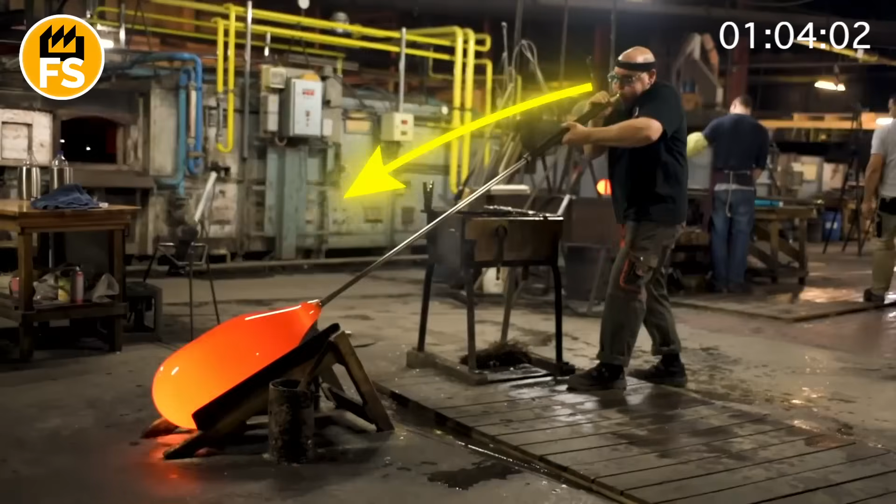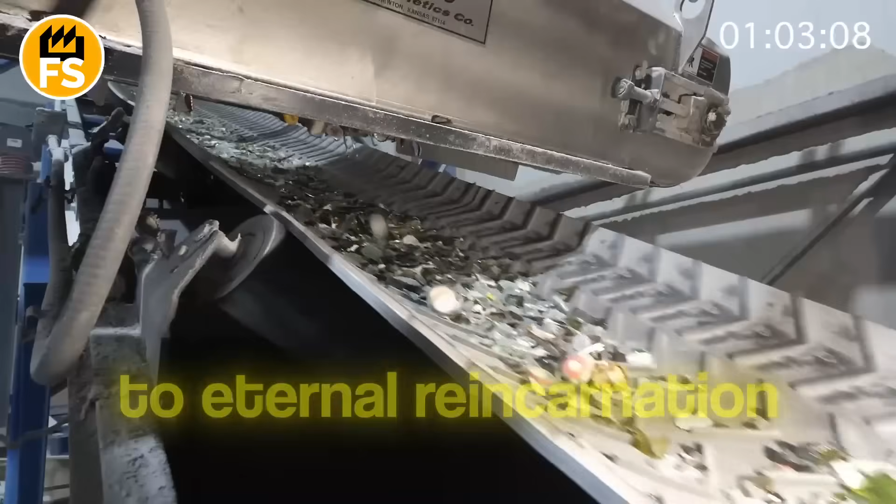From ancient glassblowers who breathe life into red-hot bubbles, to futuristic tin baths where glass is born perfectly flat like a mirror. But behind this symphony of fire lies a secret. What if glass holds the secret to eternal reincarnation, which will allow us to turn the world upside down? Watch until the end, and you'll find out something you never imagined about this transparent, amazing material. Ready for the journey?

Although the vast majority of architectural glass today is born from a perfectly flat, fiery river flowing over molten tin in the float process, the true soul of the material is revealed in methods that give it character and uniqueness. This path from a simple transparent sheet to a work of decorative art is a fascinating journey.

To create glass with individuality that carries the imprint of a human touch, masters still turn to techniques that have existed for centuries. A glassblower dips his long, hollow pipe into a furnace where a mass of sand and other minerals boils at a temperature of 2,000 degrees Fahrenheit. He gathers a honey-like ball of molten glass on the end of the pipe, and, skillfully rotating it, begins to blow air into it. The initial bubble, born from his breath, gradually transforms into an elongated, glowing hollow cylinder.

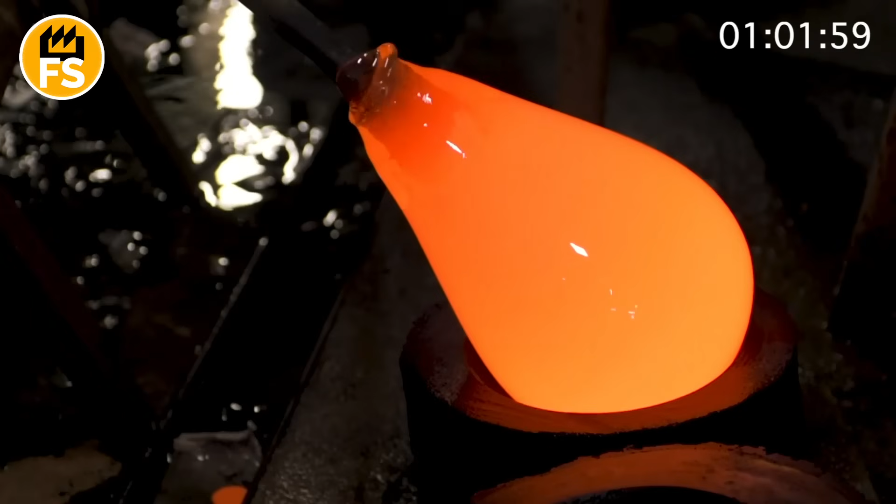Thanks to the force of gravity and skillful swinging, this cylinder can reach a length of several feet. After the ends of the cylinder are cut off, it is cut lengthwise and placed back in the furnace. There, under the influence of heat, it slowly unrolls, like a scroll, and the masters smooth it into a flat sheet.

Glass born in this way is never perfectly flat. It lives its own life, retaining barely noticeable waves, tiny air bubbles, and thin lines that tell the story of its fiery birth. This glass has a watery, organic quality that cannot be replicated by a machine.

But the creation of unique glass does not stop at forming the sheet itself. Other methods transform ordinary sheets into complex decorative elements. Fusing or sintering allows artists to literally paint with glass.

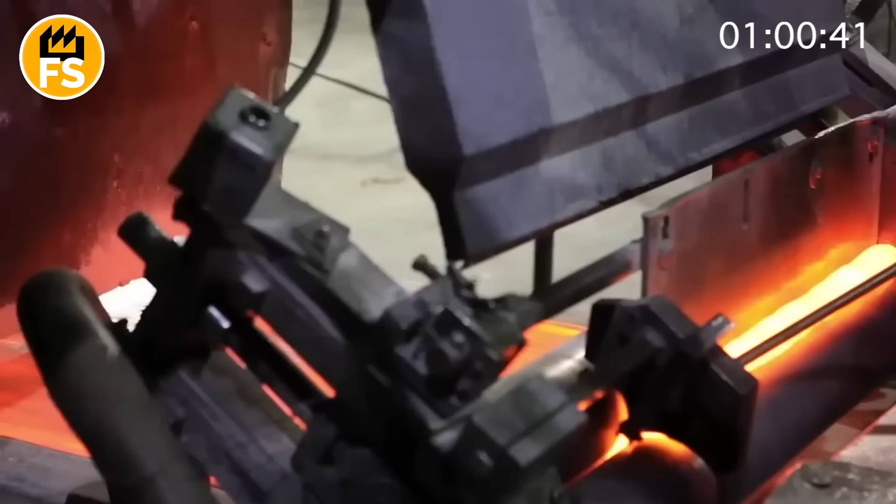Multicolored pieces of glass are laid out on a base sheet and sent to a furnace, where at a temperature of 1,500 degrees Fahrenheit, they merge into a single whole, creating bright, painting-like compositions.

Closely related to this is the process of slumping or bending, where a flat sheet of glass is heated until it becomes soft and sags under its own weight, taking the shape of a ceramic or metal mold lying beneath it. This allows for the creation of curved panels and three-dimensional glass sculptures.

Modern technologies add even more possibilities. Lamination allows for baking colored films, fabrics, or even thin sheets of metal between two sheets of glass, creating endless variations of color and texture.

Sandblasting and chemical etching remove the top layer of glass, making it matte and creating complex patterns on its surface, from simple geometric shapes to photorealistic images.

Thus, by combining ancient crafts with advanced technologies, modern production transforms simple glass into an expressive architectural material, capable of shaping light, color, and space.

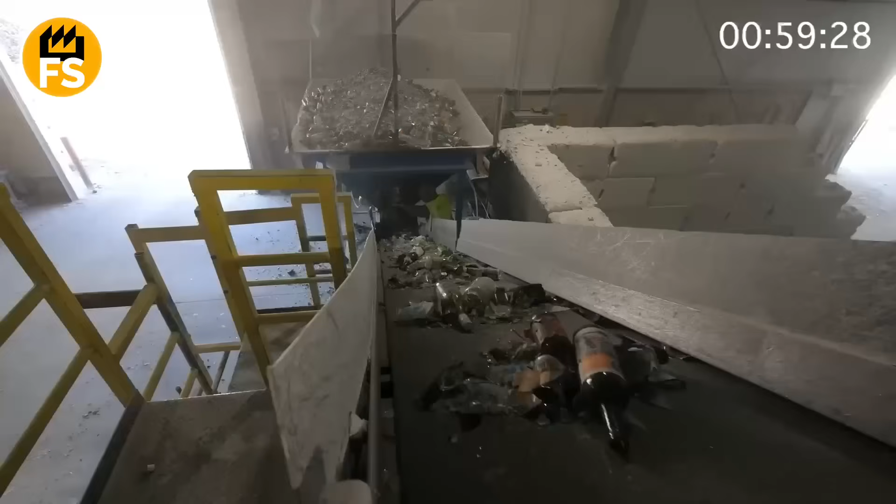In the modern world, where tons of used glass containers are collected daily, the path from the trash can to a new bottle is not just remelting, but a high-tech odyssey, controlled by computers and light.

Imagine a mountain of broken glass, reaching a height of tens of feet, where transparent, green, and brown fragments are mixed with labels, caps, and ceramic impurities. Turning this chaos into pure, raw material is a task for a whole complex of smart machines.

It all starts with mechanical crushing, where steel hammers turn bottles and jars into fragments a few inches in size.

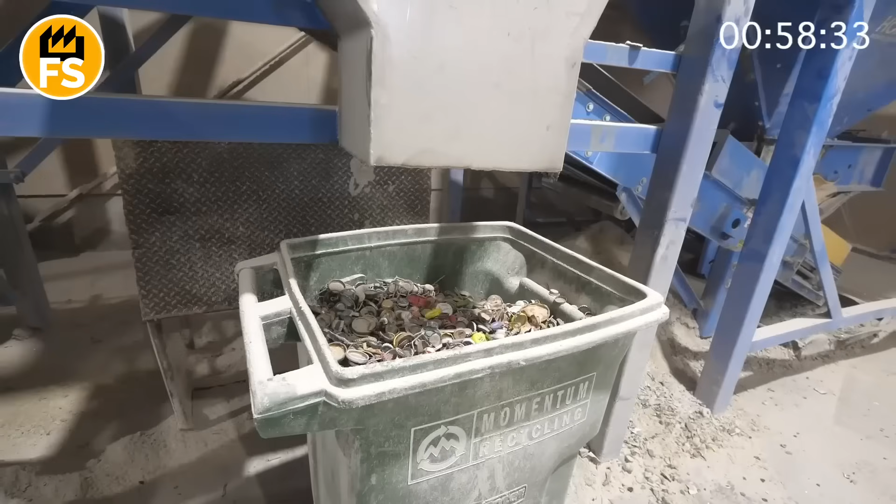This stream of glass, resembling a moving river, embarks on a journey through a labyrinth of sorting systems. First, powerful magnetic separators pull any steel impurities from the stream, and then eddy current systems literally shoot out aluminum caps and foil into separate containers. Powerful air currents blow away light paper labels and plastic remnants.

But the most difficult task lies ahead: removing impurities that are almost indistinguishable from glass in weight and size, such as pieces of ceramics, stone, or porcelain. These enemies of glass do not melt at standard temperatures and turn into defects in new products, so their removal is critically important. This is where optical sorting comes into play. The glass fragments are accelerated on a conveyor belt to a high speed and fly through a scanning zone.

For a fraction of a second, each fragment is illuminated by bright light, and high-speed cameras take hundreds of pictures. A computer system with lightning speed analyzes the images, identifying foreign bodies by their transparency, structure, and shape.

As soon as the system spots an opaque piece of ceramic, it instantly calculates its trajectory and gives a command to a battery of air nozzles. A precise, sniper-like stream of compressed air knocks the unwanted element out of the general stream, sending it to waste. This process is repeated thousands of times per minute.

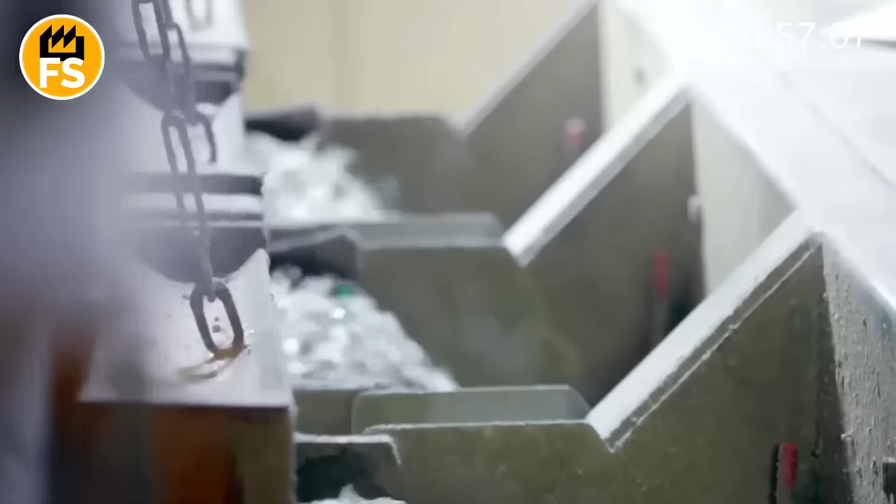In parallel, an equally important sorting by color takes place. The same optical systems analyze the spectrum of light passing through each fragment. The machine distinguishes between crystal clear, rich green, and deep brown glass.

Depending on the set program, the system can, for example, select only transparent glass, knocking out all colored fragments with air jets, or separate the stream into three separate color fractions.

As a result, at the output, a perfectly clean, color-sorted raw material is formed: cullet, ready for a new life without loss of quality, which is the pinnacle of the modern circular economy. Then, flat glass can be made from this raw material.

The birth of modern flat glass is a symphony of fire and precision, a spectacular process that transforms ordinary raw materials into perfectly transparent sheets. It all begins in a huge melting furnace, the fiery heart of the factory that operates continuously for years.

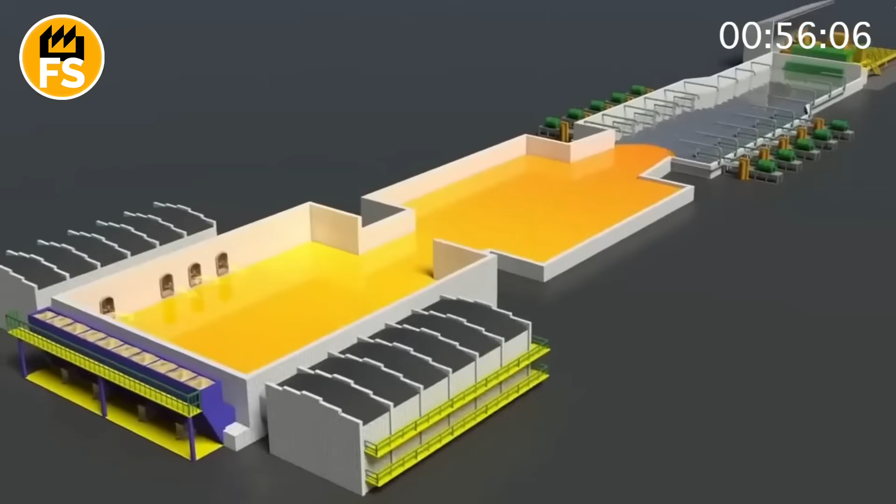Into this furnace, resembling a lake of molten fire, a carefully dosed mixture, or batch, is loaded, consisting of pure quartz sand, soda ash to lower the melting temperature, and limestone for stabilization. To this is added a significant amount of cullet, or crushed recycled glass, which helps to speed up the melting process.

Inside the furnace, at infernal temperatures approaching 3,000 degrees Fahrenheit, these solid components slowly transform into a homogeneous, viscous liquid.

The melting process is strictly controlled to ensure the complete dissolution of all particles and the removal of gas bubbles, creating a flawlessly clean melt.

From the furnace, this stream of red-hot to bright orange-colored glass, resembling a river of lava, smoothly flows into a bath of molten tin. This is the culmination of the process known as the float process.

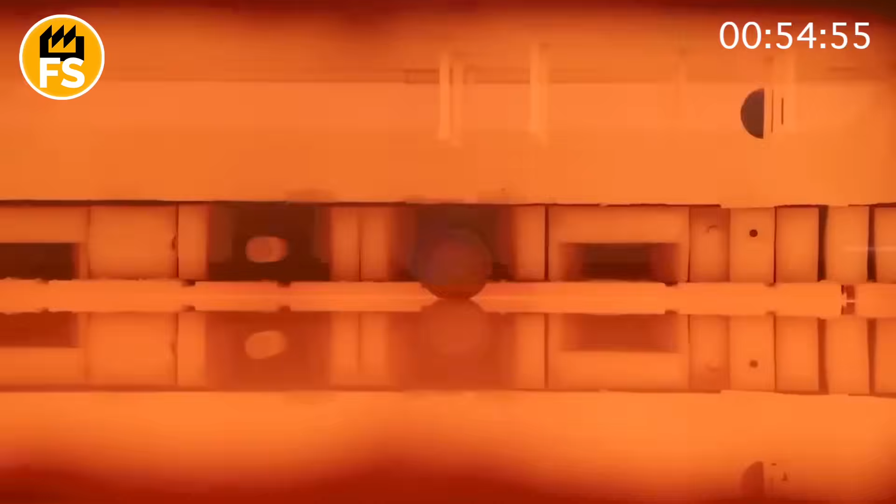The tin bath, stretching for hundreds of feet in length, has a perfectly smooth, mirror-like surface. Since glass is lighter than tin and does not mix with it, it spreads over the surface, forming a perfectly flat ribbon of uniform thickness.

Gravity levels it from below, and surface tension smooths it from above, creating impeccable optical quality. The speed at which this ribbon is pulled from the bath determines its final thickness with an accuracy of a fraction of an inch.

After forming a perfectly flat surface, the glass ribbon, still very hot but already solid enough to hold its shape, enters the most tranquil but critically important stage: annealing. It enters a long tunnel known as an annealing lehr.

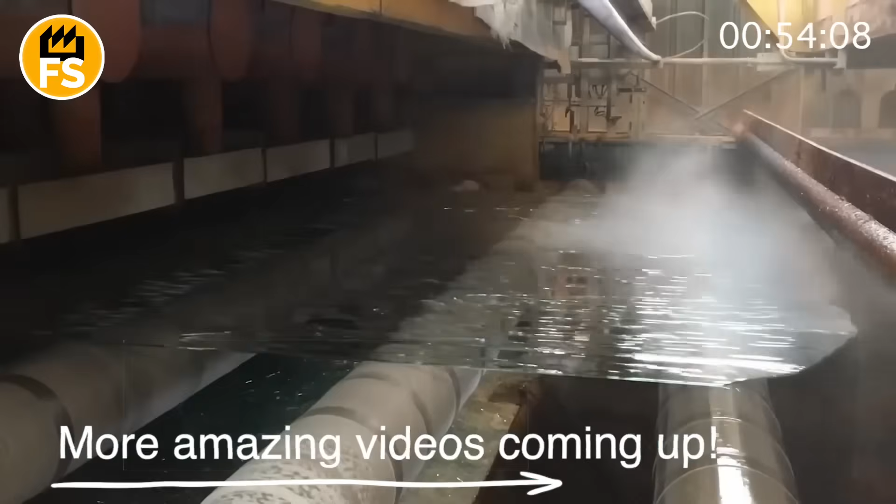If the glass were cooled too quickly, its surface would contract faster than its interior, leading to the creation of huge internal stresses that would make it brittle and prone to cracking.

In the lehr, however, the temperature of the glass is slowly and controllably reduced over several hundred feet, from over 1,000 degrees Fahrenheit to room temperature. This process allows the entire sheet, both surface and core, to cool evenly, relieving all internal stresses.

From the other end of the lehr emerges a single, flawless, continuous ribbon of completely transparent, stress-free glass, ready for automatic cutting into huge sheets that will become the windows, facades, and doors of our world.

Every year, only a few dozen combat machines capable of changing the course of a battle are produced worldwide. One such giant is born in the heart of the United States at the Boeing factory in Fort Worth, where every bolt, every weld seam is inspected with micron precision.

Here, fuselages made from metal plates are joined into a single, strong body, and powerful T-700 engines and Hellfire missiles turn the machine into a formidable weapon.

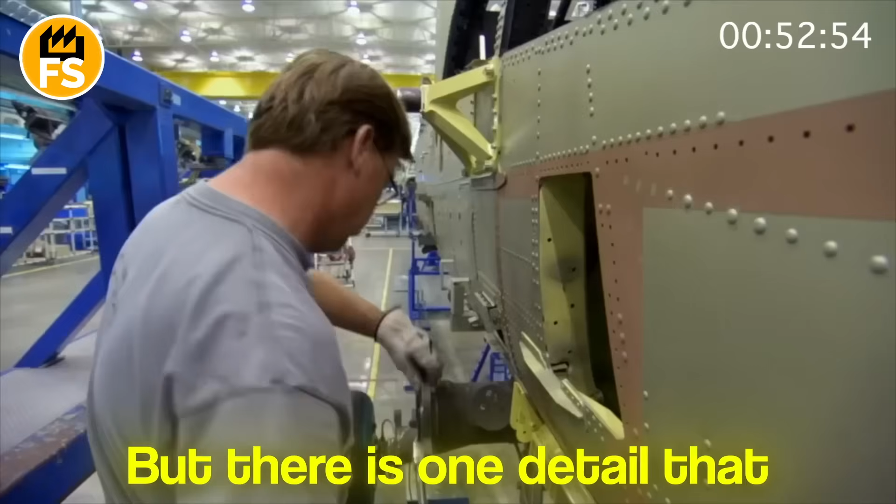But there is one detail that only those who work behind the scenes of this production know. Watch until the end, and you will discover a secret that changes the perception of these helicopters forever.

The main production facilities are located in the United States, particularly at the Boeing plants in Fort Worth, Texas, where the helicopter is manufactured using modern technologies. At these plants, the assembly of the helicopter's main components, such as the fuselage, rotors, and weapon systems, takes place. The production process includes automation to increase efficiency and accuracy, which is critically important for military equipment.

An important part of the production capacity is also contracts with component suppliers. Orders for electronics, engines, control systems, and other parts come from various corners of the world. These suppliers must meet strict quality standards to ensure the reliability and combat readiness of the helicopter.

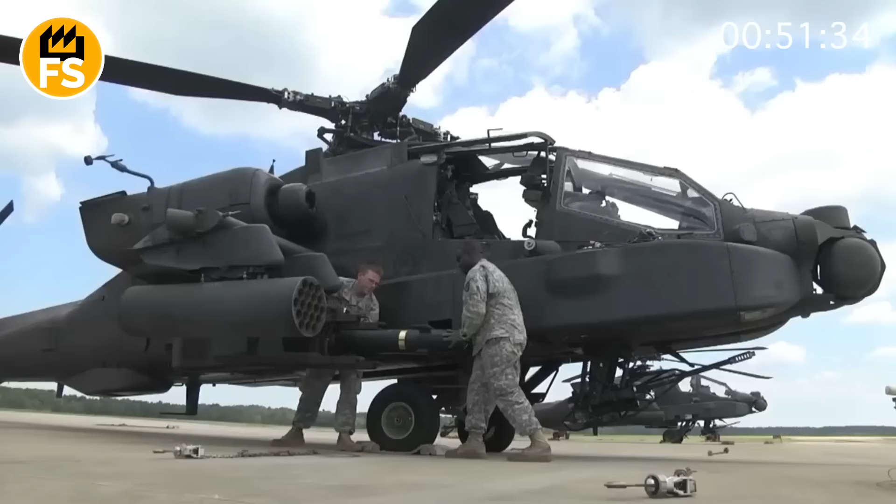The U.S. Department of Defense works closely with Boeing to control production, ensuring compliance with all specifications. This includes conducting regular inspections and tests at various stages of production to account for all potential problems.

The production facilities engaged in manufacturing the AH-64 are constantly improving their processes. With the introduction of new technologies and production management methods, such as lean manufacturing, the company strives to reduce costs and shorten production time without compromising quality.

The main components, such as electronics, engines, navigation, and control systems, are manufactured in different countries. For example, the T-700 engines used in the AH-64 are produced by General Electric in the USA.

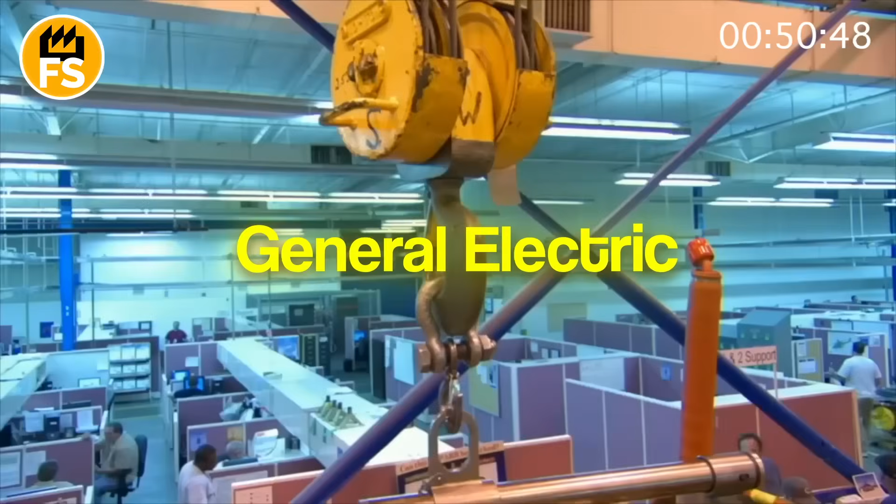Weapon systems, such as Hellfire missile launchers, are manufactured by many defense contractors, both in the US and outside the country. The electronic system, including radar and fire control systems, is supplied from various countries, such as Israel and the United Kingdom. This allows for the integration of innovative technologies that are constantly being improved in military aviation.

The delivery of components to the Boeing production facilities in Fort Worth is carried out through various logistics channels. International transport is often carried out by air and sea, depending on the urgency and volume of the cargo. Key components can be delivered by express air transport to reduce manufacturing times.

Upon arrival at the Boeing plants, the components undergo additional inspection to identify possible defects and non-conformities.

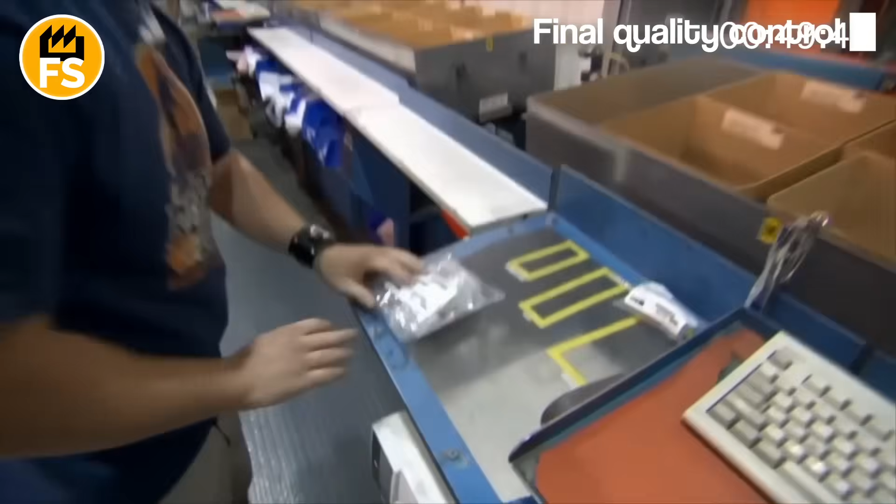After the delivery of all components to the Boeing production facilities, they arrive at the huge factory territory in Fort Worth, where several hangars are organized for helicopter assembly. Here, a primary inspection of each batch of parts is carried out. Specialists carefully inspect the components to identify any defects or non-conformities with standards, which ensures a high level of quality.

The production process begins with the assembly of the fuselage, which is the helicopter's foundation. In this stage of work, huge metal panels, drawn out in the form of long and wide sheets, are used. The fuselage consists of several sections that are welded together to create a single, strong body.

First, the workers coordinate all requirements and drawings, focusing on the accuracy of measurements. They carefully install the fuselage base on a special platform that allows easy access to all elements.

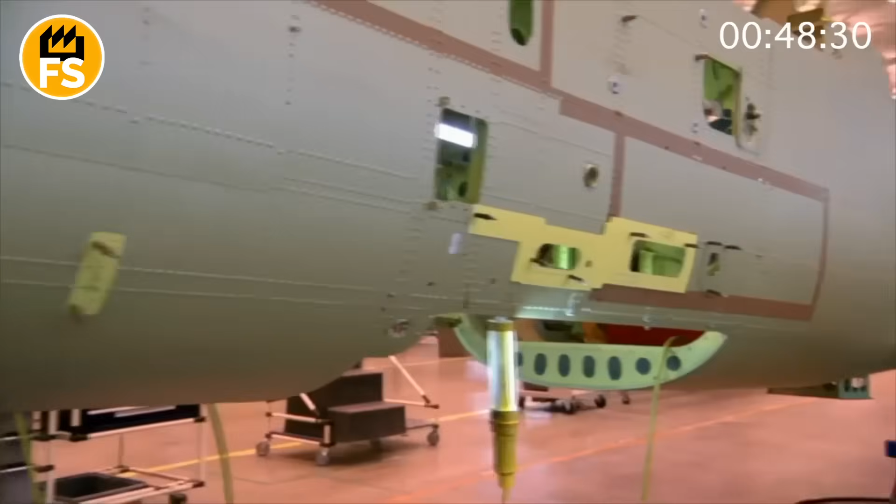In parallel with this, engineers ensure that each element meets strict quality standards. During the fuselage assembly process, workers use a variety of tools, from electric drills to specialized welding machines.

Welding takes place far from any unpredictable movements, as this is critically important. Even the slightest inaccuracy can affect the helicopter's combat stability. The flame of the welding illuminates the workspace, adding a bit of heat to the surrounding environment.

After the main parts of the fuselage are joined, it is checked for leaks. This includes leak testing where liquid is pumped through special pipes to ensure that the body's reliability meets the requirements. Usually, workers suspect a problem if they hear a sound similar to a whistle or a pop, which could indicate issues.

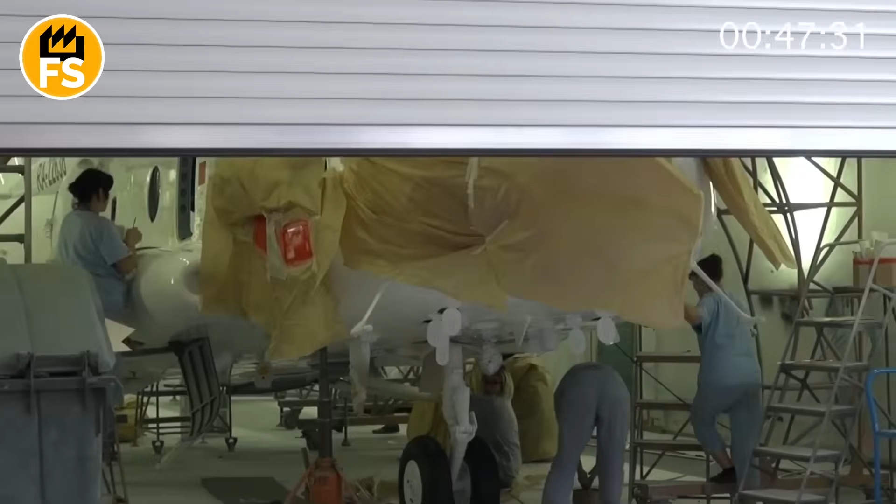When the fuselage successfully passes all tests, it is time for painting. The application of coatings is important as it prevents corrosion and increases resistance to weather conditions. After painting, the fuselage is sanded to ensure a smooth surface, and then all parts are checked again to confirm they are installed correctly.

After the fuselage assembly is complete, the next stage is the installation of the electronic systems, which play a critical role in the combat effectiveness of the AH-64. After the fuselage is prepared, it is moved to a special hangar where technicians begin to carefully install various electronic components. These systems control everything from navigation to the weapon control system.

During this process, specialists install elements such as radar, which provide an overview of the battlefield, as well as fire control systems. These components are particularly sensitive, so it is important to adhere to huge accuracy. Workers use various tools, such as drills and screwdrivers, as well as specialized devices for laying wires.

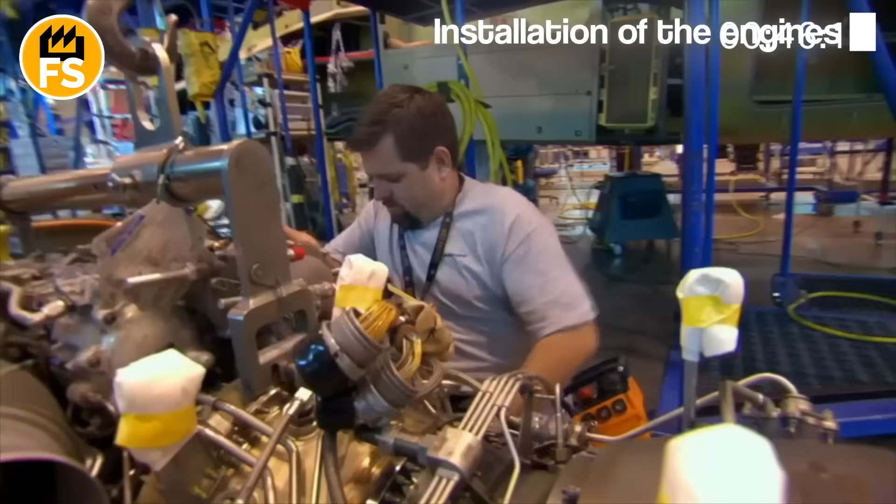The next step is the installation of the engines. For the AH-64, T700 engines are used, which are powerful and reliable. After the engines are delivered to the factory, technicians check them for compliance with technical specifications.

During the installation process, the engines are mounted on the fuselage, and all necessary systems, such as fuel supply and cooling, are connected. This process requires great attention to detail, as the engines must be securely fixed and correctly connected.

After the installation of the engines and electronics, the stage of integrating the weapon systems begins. The helicopter is equipped with various armaments, such as Hellfire missiles and an M230 machine gun.

In this stage, technicians use multi-step procedures to install and calibrate the systems. Each weapon unit is equipped with electronic systems that ensure its functionality. After installation, a check for the compatibility of all components is carried out.

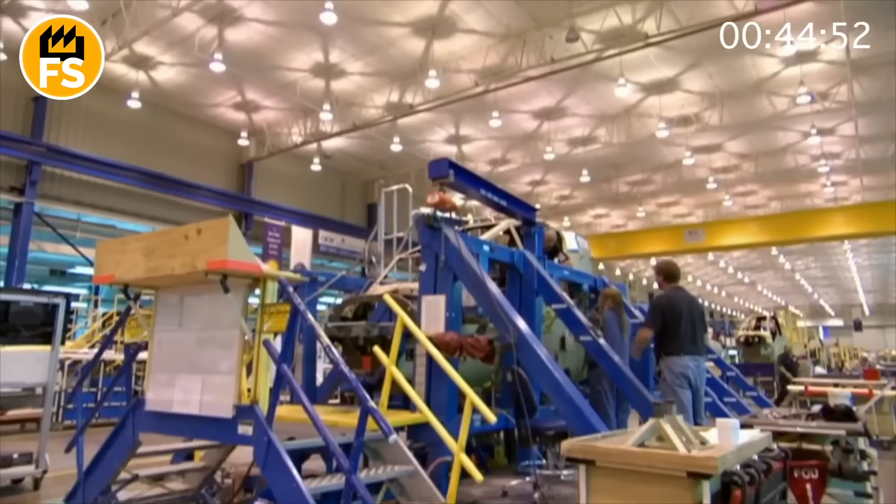Having completed the integration stages, the fuselage proceeds to final assembly, where various systems are connected: hydraulics, as well as control mechanisms. Hydraulics provide the helicopter's mobility, and its installation is a critically important task. Technicians check all connections for tightness, as a leak of hydraulic fluid can lead to serious problems during flight.

During the testing of the AH-64, a real show of technical skill takes place. Aerodynamic checks are conducted in a large open area where the helicopter takes to the air, demonstrating breathtaking maneuvers. From a height, it performs turns, hovers in the air, and makes steep descents, showing its stability and ability to react quickly to the pilot's commands. Spectators can see how the powerful engines work at maximum revs, filling the air with their roar.

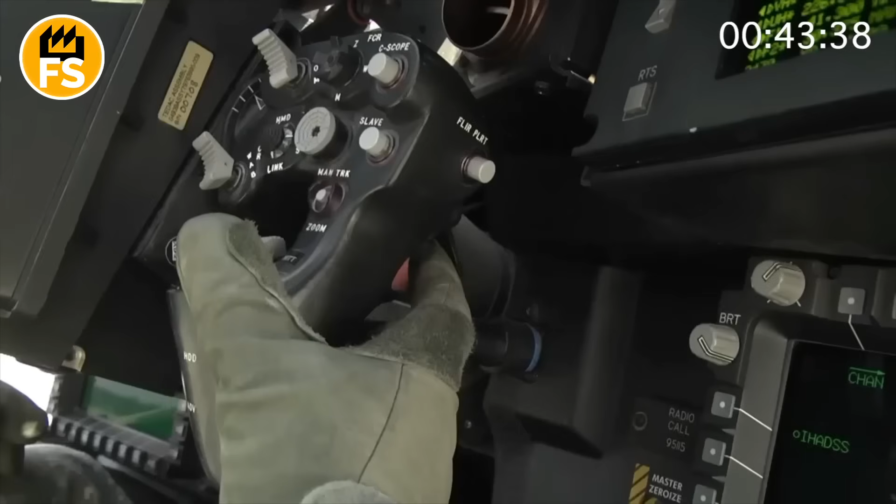On the ground stand, the atmosphere is also tense. Experts closely watch every movement of the helicopter, keeping an eye on the digital indicators on the monitors. The sounds of testing the electronic system, as the helicopter actively responds to control commands, are impressively complex. When the weapon system is launched and green indicators appear on the monitors, everyone present experiences a moment of elation. It's a sign that everything is working, and the helicopter is ready for combat missions.

The team of engineers is gathered on the territory. They are dressed in special equipment and focused on their work. When the entire system passes the checks, a look of satisfaction appears on the experts' faces. Each of them knows that their work is bearing fruit, and the ready-for-real-flights helicopter will become an important element of military power. These tests provide not only an adrenaline rush, but also pride in the technologies that bring it to life.

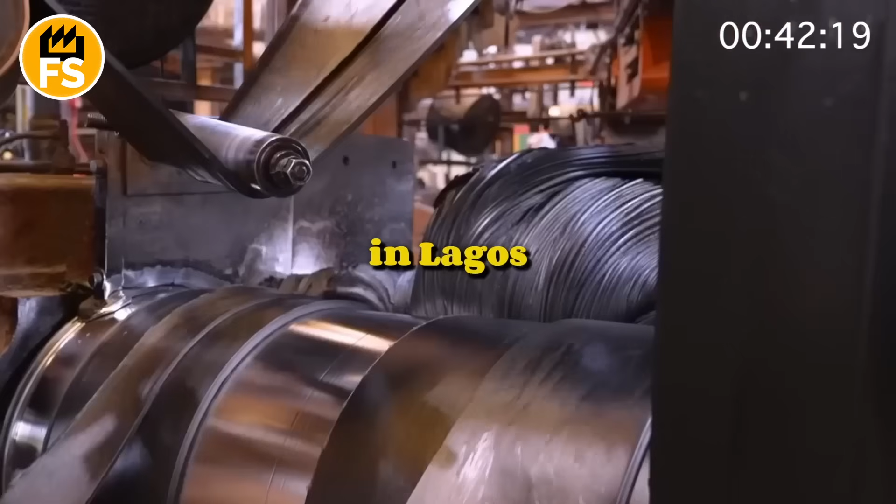Every hour, over 4.5 million tires are discarded worldwide. But in Nigeria, a country with over 220 million people, old tires are not just trash. They are a currency for survival, an underground business, and even art. Here, worn-out rubber doesn't go to a landfill. It's taken apart, rolled on bicycles, cut by steel jaws, and baked into colorful tiles. How did poverty, ingenuity, and chemistry create a whole shadow industry? And what unexpected secret is hidden in one of the largest pyrolysis furnaces in Lagos? Watch until the end, and you'll see what they probably don't show in textbooks.

Nigeria is the most populous country in Africa, home to over 220 million people. For many of them, a car is the primary means of transportation and doing business. Millions of passenger cars, minivans, trucks, and motorcycles travel the country's roads daily, inevitably wearing out their tires. The more vehicles, the larger the flow of used tires.

The condition of roads in many regions of Nigeria is, to put it mildly, far from ideal. Numerous potholes, ruts, gravel surfaces instead of asphalt, and the general neglect of the road network lead to extremely rapid and aggressive tire wear. A tire that could last 40 or 50,000 miles in countries with high-quality roads might become unusable 2 or even 3 times faster in Nigerian conditions.

A significant portion of cars in Nigeria are imported used vehicles, known as tokunbo. They often arrive from Europe, the United States, and Asia, with already significantly worn tires that require almost immediate replacement after purchase. This creates an immediate stream of old tires into the waste market.

Due to economic hardships, many Nigerian drivers cannot afford expensive and high-quality tires from leading brands. They are forced to choose the cheapest options: either low-quality new tires, mainly from Asian countries, or already used tires. Both options have a very short service life, which creates a continuous cycle of buy, drive a little, throw away.

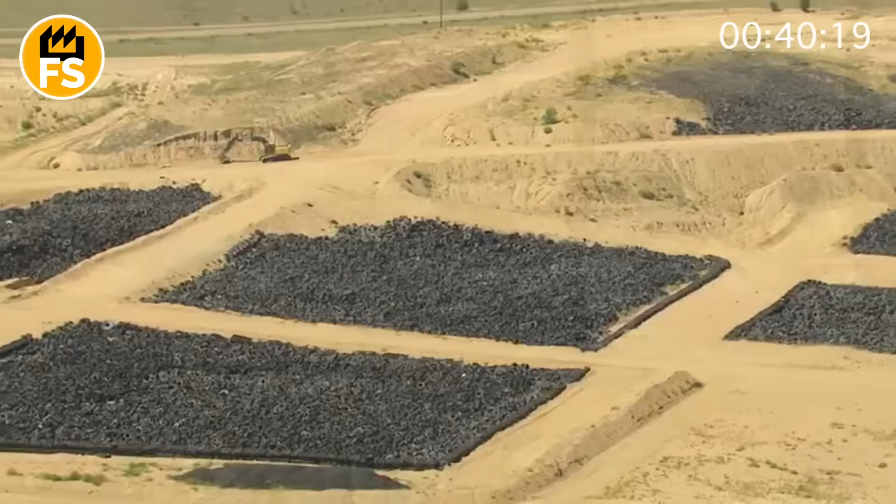Until recently, the country effectively had no established and efficient state system for collecting and recycling tires. Without proper disposal infrastructure, old tires simply accumulated in makeshift dumps, on roadsides, in vacant lots, and in water bodies, turning into a serious environmental threat. Only recently have entrepreneurs begun to see a business opportunity in this.

The process of collecting tires in Nigeria is a fascinating, mostly informal, and multi-level system that operates not by government decree, but by the laws of the market and simple economic benefit. At the heart of the entire chain are thousands of individual collectors. These are often young men or people with low income, for whom collecting waste is their main livelihood.

So, where do they collect them? The main source is tire shops and car repair workshops. Drivers leave old tires after a replacement. For the workshop owner, this is trash that needs to be disposed of. A collector pays him a small amount, or simply takes them for free.

Collectors also literally patrol their neighborhoods, looking for abandoned tires in makeshift dumps and on roadsides. The tires are rolled by hand, transported on wheelbarrows, bicycles, or small 3-wheeled scooters. One old tire can cost from 50 to 200 naira, a few American cents, depending on its condition and size. It's not much, but by collecting several dozen a day, one can make a living.

Collectors rarely deal directly with large factories. They sell their harvest to local middlemen.

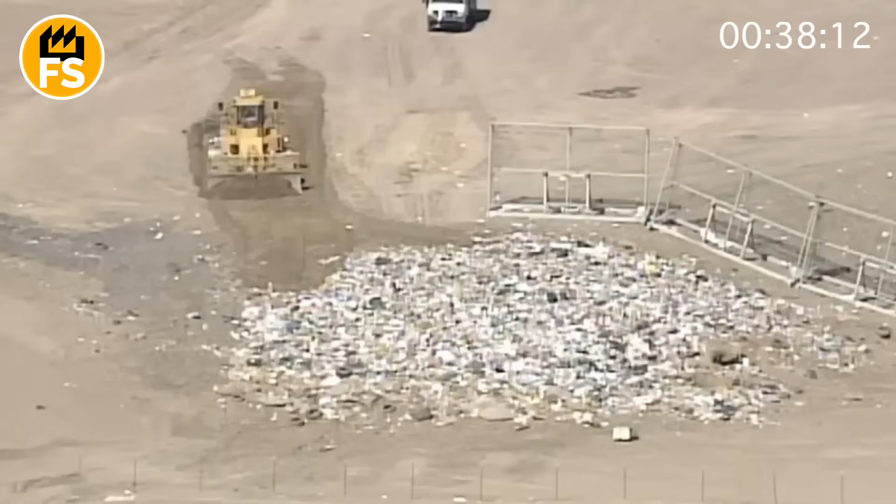This is where those mountains of tires appear, but on a local scale. In the yard of such a middleman, you can see piles of tires that he accumulates, waiting for a good price or a sufficient volume for transport. Basic sorting might happen here, for example, separating truck tires from passenger car tires.

The middlemen make their profit on volume. They buy cheap from collectors and sell for a higher price to large processors.

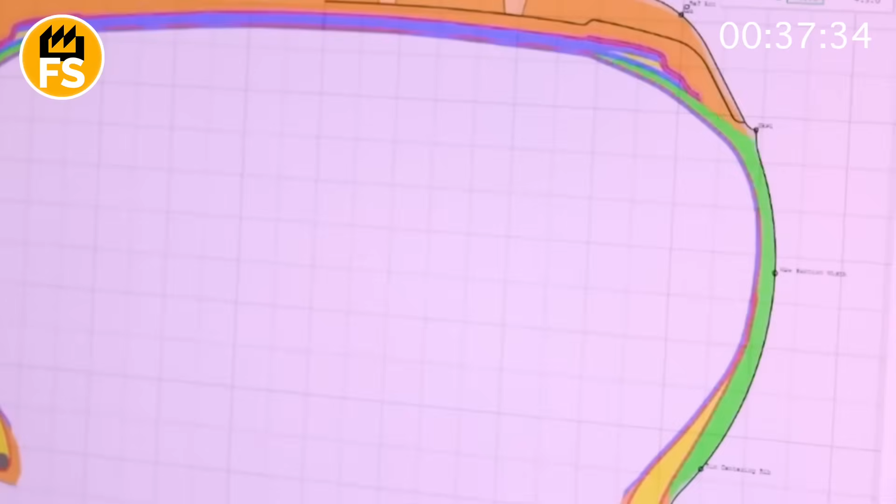Large recycling companies are at the top of the chain. Companies engaged in pyrolysis or the production of rubber crumb are the final buyers. These are recycling plants like Freetown Waste Management Recycle or large pyrolysis facilities. They make deals with the middleman. The aggregator loads a large truck of 5 or 10 tons and brings the tires directly to the plant. The plant accepts the raw material, weighs it, and pays the middleman by tonnage.

This is where the final, professional sorting takes place. The tires are inspected, cleaned of dirt and foreign objects before being sent to a shredder or pyrolysis furnace. As soon as the tires arrive at the recycling site, they head down one of 2 main paths. The choice of path depends on the technologies the company possesses and the final product it wants to obtain.

Pyrolysis is a method used by large industrial plants. The goal is to break down the tire into its basic chemical components to obtain industrial raw materials. Tires cannot be loaded into the reactor whole. First, they undergo tough preparation. Powerful hydraulic shears cut out the bead ring from the tire, a thick steel wire that ensures a tight fit on the rim. Then the tire is sent to an industrial shredder.

The machine's steel jaws tear and cut the rubber into pieces a few inches in size, turning it into a uniform mass resembling coarse chips. The prepared rubber pieces are loaded into a sealed metal reactor.

This is the heart of the entire process. The reactor is heated to high temperatures, 800 degrees Fahrenheit, but the key condition is a complete absence of oxygen. Because of this, the rubber doesn't burn. Instead, its long polymer molecules begin to break down into simpler substances. As a result of the heating, a mixture of 3 fractions is formed: a gaseous fraction, a liquid fraction, and a solid residue.

After the cycle is complete, the factory obtains 3 products ready for sale. The first is pyrolysis oil, which is used as fuel for industrial furnaces and boilers. Carbon black is sold to manufacturers of paints, plastics, and new rubber products, and the steel wire is collected by magnets, pressed into briquettes, and sold as scrap metal.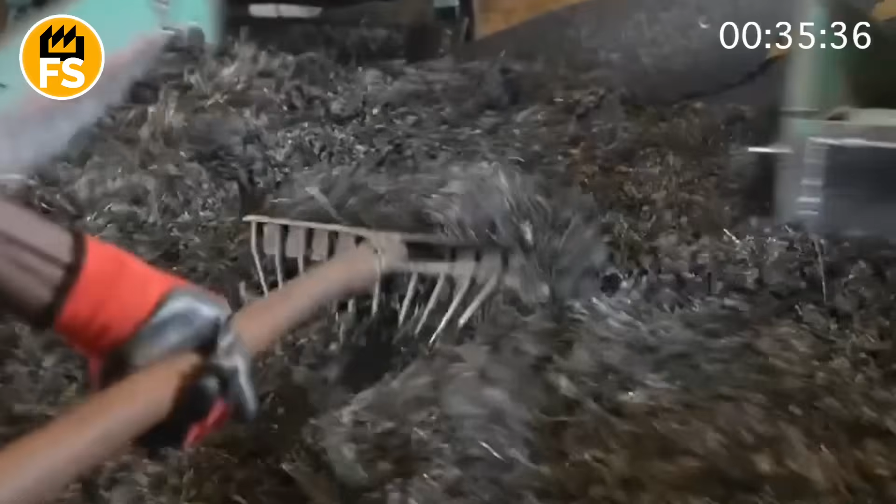Another path for recycling old tires is mechanical recycling and upcycling. This path is chosen by companies like Free Recycle, which create finished consumer goods. There is no chemical reaction here, only physical transformation. The tires also go through shredders, but the goal here is to obtain clean rubber crumb of various sizes. During shredding, powerful magnets extract steel fibers from the rubber mass, and air separation systems blow out textile fibers. The output is clean rubber granules.

The rubber crumb is poured into a large mixer. 2 key ingredients are added to it: polyurethane glue and pigments. The glue will bind the rubber particles together, and the pigments will give color to the future product. The resulting mixture is thoroughly mixed until uniform.

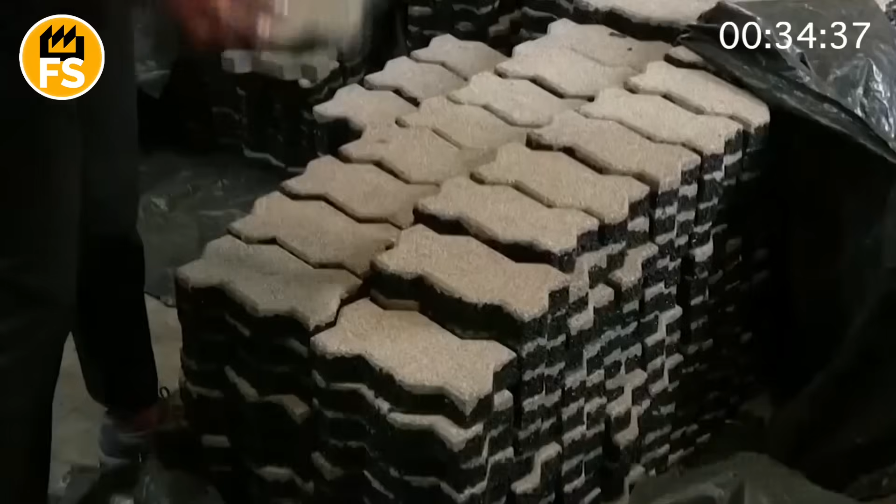The colored rubber mass is placed in metal molds of the desired configuration, for example, in the shape of paving tiles or mats. Next, the mold is sent under a hot press. High temperature and pressure activate the glue, baking the crumb into a single, durable, and elastic product. This can be bright and safe paving tiles for playgrounds, durable flooring for gyms or garages, soles for shoes, or even entire flip-flops.

A separate direction is upcycling, where whole tires or their large pieces are turned into original furniture, such as tables or chairs and other decorative items. Thus, depending on the chosen path, an old, unwanted tire is transformed either into a valuable industrial raw material or a new useful household item.

Every year, over 50,000 tons of uranium are mined worldwide. But to get just a few grams of energy from it, you have to move mountains. It all starts in the desert, where the temperature reaches 100 degrees, and ends in a reactor that powers New York. Here, centrifuges that spin faster than an airplane turbine, and substances that corrode metal in seconds. But the most interesting part is what even safety instructions don't talk about. Watch until the end, and you'll discover a secret that will change your perception of nuclear energy.

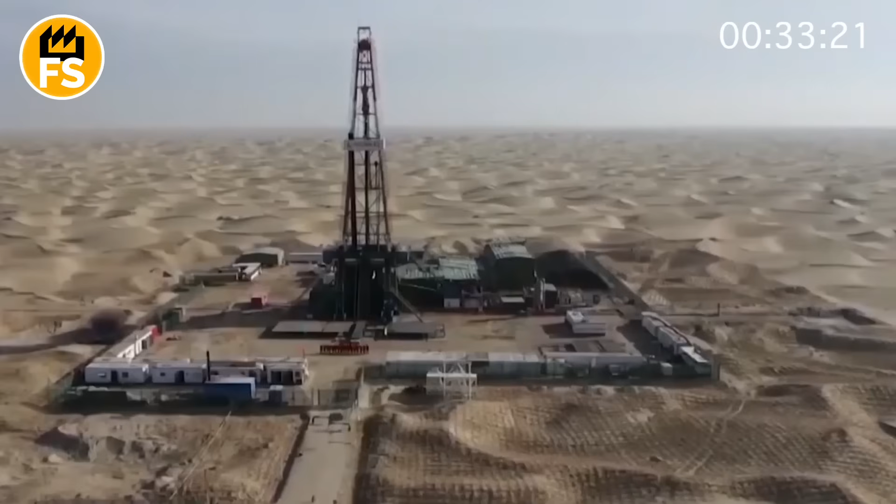It all begins in the dust, and that's not figuratively speaking. Uranium ore is mined in hot regions: Arizona, Wyoming, Texas, New Mexico. Sort of like cowboy landscapes, only instead of lassos, there are drilling rigs, and instead of a sheriff, engineers in anti-radiation suits. The sun here is scorching, up to 100 degrees Fahrenheit in the shade, if you can find any.

There are two ways of mining: open pit, where the top layer of soil is removed and the ore is pulled out by excavators, and underground mining, with explosives, lifts, and ventilation that howls like an old tractor. There's also the in-situ leaching method. Pipes are driven into the ground, and special solutions are pumped in to wash out the uranium directly from the rock, then it's pumped back out.

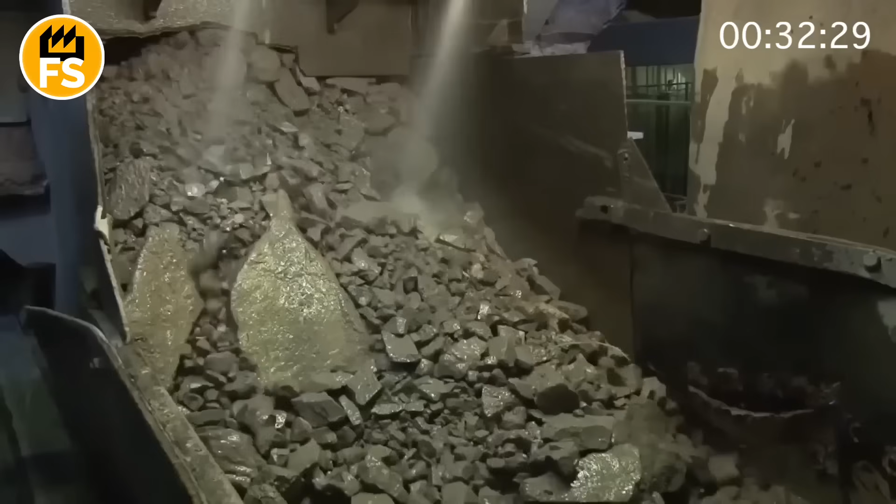All this ore, a grayish-brown rock, looks no different from ordinary stones. But in it, uranium-235 is only 0.7%. The rest is almost useless mass that doesn't work in a reactor. And to squeeze the needed drop of energy from it, you have to process hundreds of tons. That's why they say nuclear energy is quite a marathon.

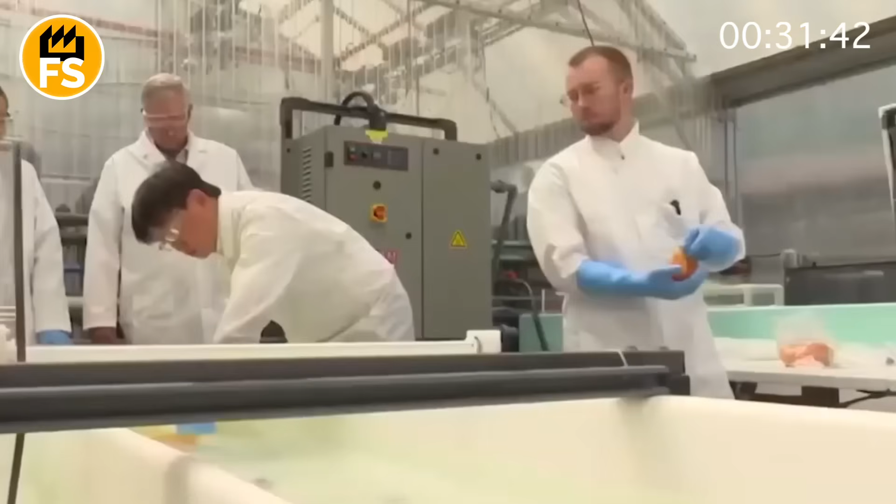After mining, the ore is crushed, ground, and thrown into a chemical bath. Acid or alkaline solutions are added to extract the uranium, like coffee from a filter. Then filtration, precipitation, drying at 500 degrees Fahrenheit. And at the output, yellowcake, a yellow, powdery concentrate. The official name is natural uranium concentrate, but everyone at the plants just calls it yellowcake. It looks beautiful, mustard-colored, fluffy, like a spicy powder for barbecue.

But God forbid you inhale or touch it. Alpha radiation, a long half-life, dangerous dust that penetrates the lungs and settles there forever. People work with it only in respirators, suits, behind 3 layers of glass protection.

Yellowcake is packed into double-walled barrels, loaded onto trailers with an escort, and wrapped with radiation signs. And off it goes to the enrichment plant. It's from this poisonous dust that the journey begins, leading to the white light of a lamp over a kitchen table, or the electricity in the subway rushing under New York. Well then, yellowcake is here, in barrels, radioactive and dry as a desert wind.

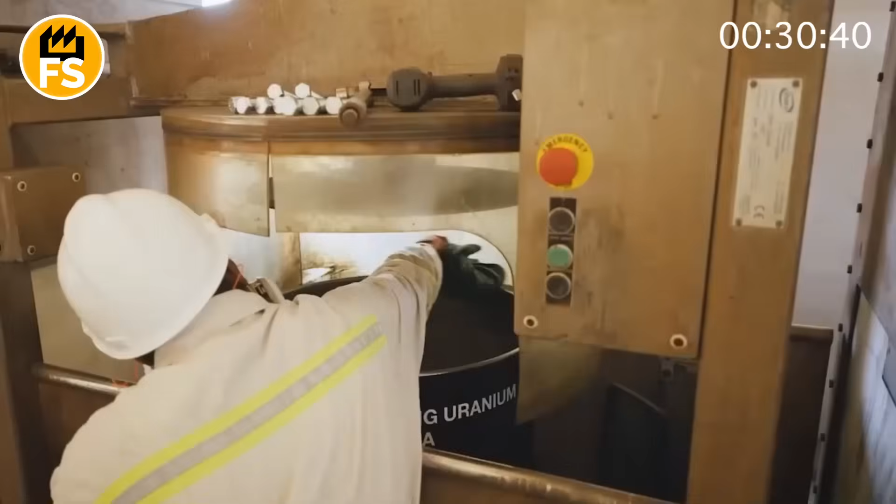The next step, turning it into a gas. And not just any gas, but uranium hexafluoride, the very same from which the required isotope for reactors and more is later separated. Let's cook, baby! The uranium concentrate is first dissolved in acid, purified, filtered from impurities, and converted into uranium dioxide.

And here the magic begins. Uranium dioxide is treated with fluorine in special reactors at a temperature of 1000 degrees Fahrenheit. As a result of the reaction, a volatile, transparent gas is formed, which boils at 133 degrees Fahrenheit. That is, you just need to heat it a little, and it turns from crystals into vapor.

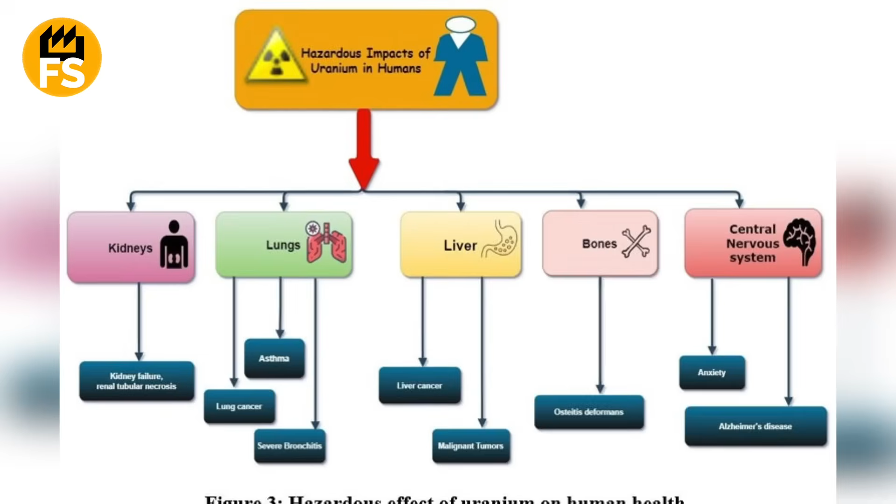But it's not that simple. It is extremely toxic. It corrodes metals, destroys skin, and in humid air, it immediately turns into hydrogen fluoride and uranyl fluoride. That is, a deadly cocktail.

That's why all this is done in sealed, automated reactors that look more like devices from a villain's laboratory. Temperature, pressure, ventilation, everything is under control. Workers sit behind thick windows, monitoring the sensors. Any mistake, boom, or hiss, and you're already in a hazmat suit, scratching your heels on the way to the shower. This substance forms as solid whitish crystals when cooled to room temperature.

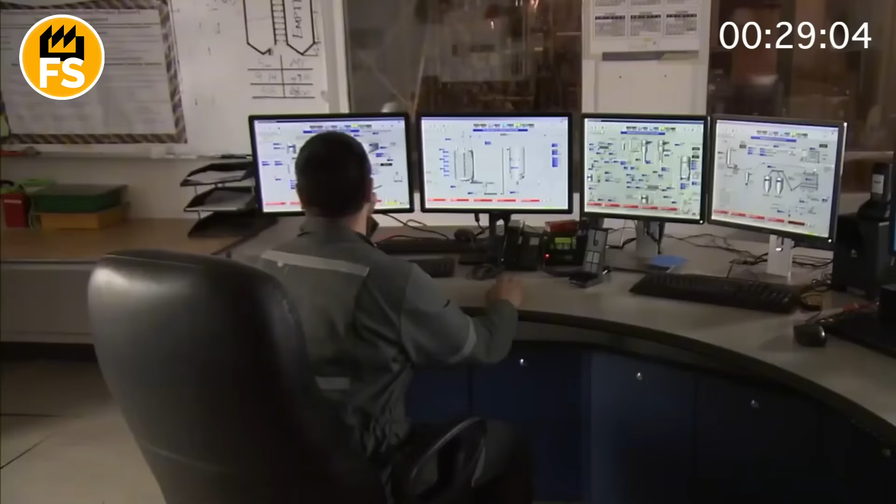These crystals are stored in steel containers, barrels with engravings, a batch number, and a radioactive sign. Each one weighs under 14 tons. And so, mission accomplished. The dust is turned into gas, ready for the most interesting part: isotope enrichment.

But don't rush to celebrate. This gas is like a wild cobra, beautiful, shiny, but if it bites, no one can save you. You think spinning a washing machine is fast? You haven't seen nuclear centrifuges that do 70,000 revolutions per minute. That's 10 times faster than an airplane turbine. And all for one thing, to separate uranium isotopes.

The uranium hexafluoride, that same poisonous gas we just made, is pumped into a tall, narrow cylindrical chamber, which is spun up to an insane speed. Centrifugal force does its thing. The heavier U-238 atoms fly to the edge, while the lighter U-235 atoms stay closer to the center. A tiny, microscopic difference, 1% in mass, and all this explosive technology spins just for it.

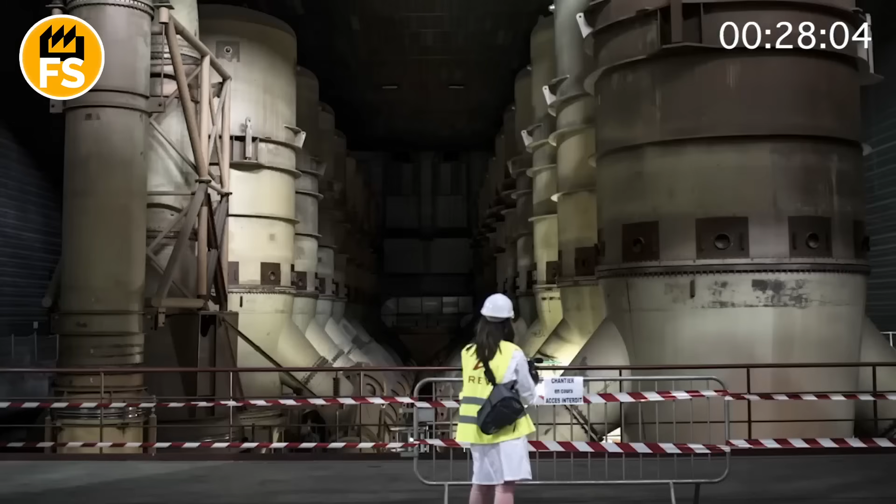But one centrifuge is not enough, so they are connected in cascades of hundreds, sometimes thousands. Each one slightly enriches the gas, then passes it to the next. And so cycle after cycle, until the U-235 content becomes at least 3 or 5%. This is the reactor standard.

For weapons, of course, completely different routes are taken. They are classified and under strict international control. Okay, the gas is enriched, but in its gaseous state, it won't feed a reactor.

So now it's converted again, this time into a solid ceramic form. After a series of chemical reactions with hydrogen, oxygen, and ammonia, the gas becomes uranium dioxide, a solid substance with a dark gray color. This powder is pressed under a pressure of 20 tons into small cylindrical pellets with a diameter of 3/10 of an inch.

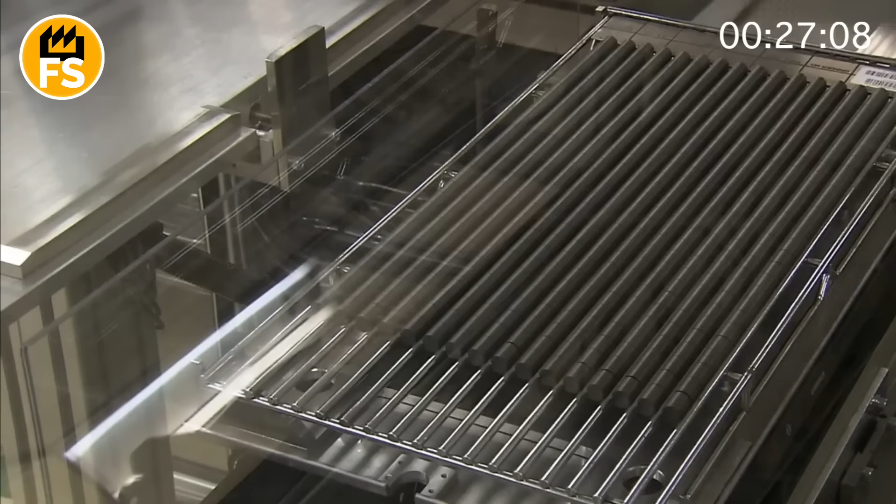They look almost cute, but each such pill is like a charge of energy equivalent to 17,000 cubic feet of natural gas. Next, the pellets are sintered in furnaces at almost 3,000 degrees Fahrenheit to make them strong, like porcelain.

Then they are polished, ground. Perfect dimensions are important for a tight fit in the cladding. The pellets are placed in long metal tubes, fuel rods, usually made of a zirconium alloy, because it doesn't rust, doesn't react with water, and withstands insane radiation.

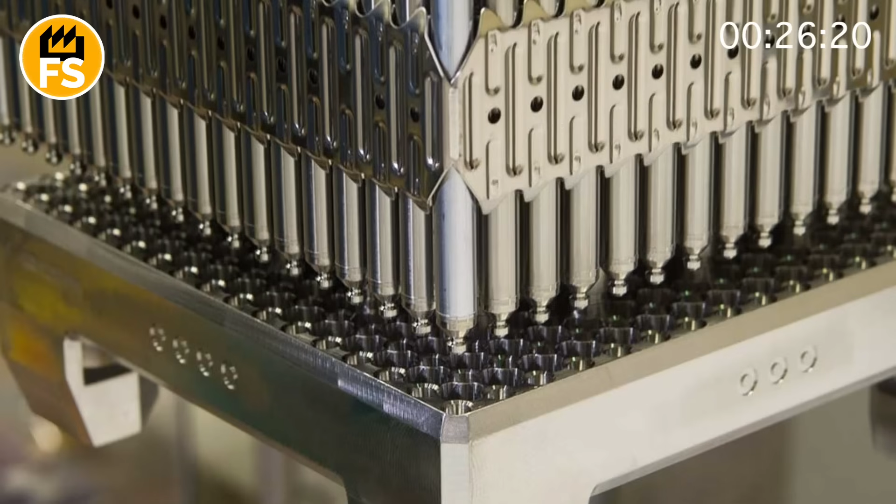Over 300 pellets are placed in each rod. The rods are hermetically welded and combined into modules, fuel assemblies. They look like a frame of several dozen tubes, assembled in a square. One such assembly can weigh over 1,500 pounds and works for up to 6 years in a reactor.

After assembly, testing for leaks, uniformity of filling, weld integrity, behavior under temperature. There are no trifles, because each of them can cost not just money, but lives. The finished fuel is packed in armored containers that can withstand impacts, fire, and falls from a height.

Transportation is under guard on a special route with an escort, GPS, and mandatory 2 seals, 3 codes, and a dosimeter on each side. Because even in its peaceful form, this is a dangerous thing that commands respect.

After all this, what remains is depleted uranium hexafluoride. They call it tails. It's a mixture of isotopes where there's still a bit of uranium-235, but not much. These tails are stored in steel drums on special sites under supervision. But in the future, they can be reprocessed in new generation reactors, where everything will be squeezed out to the last drop.

When a fuel assembly has served its 4 or 6 years in the heart of a reactor, it's no longer the shiny star it was at launch. It is removed, carefully, with a robotic system, and moved to pools of water. The depth is over 20 feet.

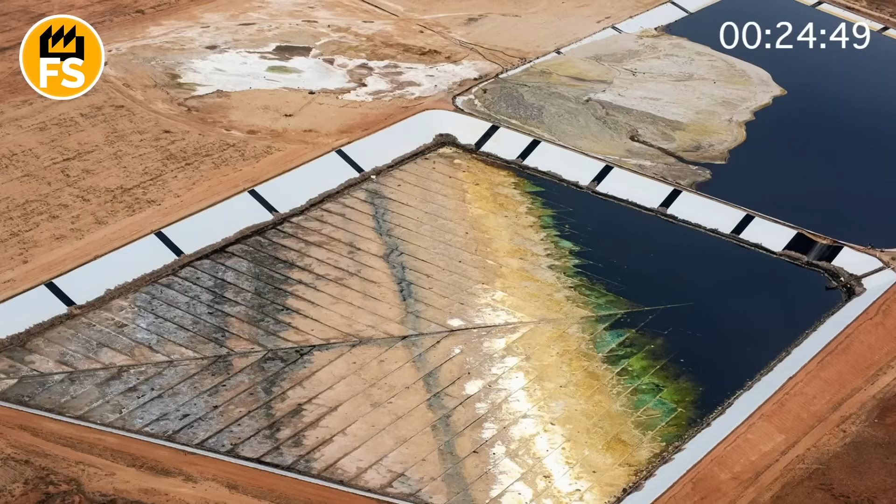The water cools and shields the radiation because the fuel is still hot, physically and radioactively. There it rests for several years. Then, 2 paths: either long-term dry storage in concrete containers with double walls, or reprocessing in other countries, because the US mostly stores rather than reprocesses.

In dry storage, the cassettes stand for decades, cooled by natural ventilation, as if in a nuclear monastery. This is not the end, but a new stage of life. Slow, controlled, but deeply connected to the future of energy. Because even after the reactor, this fuel remains a source of heat, a lesson, and a reason for respect.

Every year, over 30 million tons of bamboo are harvested worldwide. But did you know that this seemingly ordinary grass can transform into steel, silk, and even concrete? It grows faster than any tree, absorbs more carbon dioxide than a forest, and doesn't require replanting. But the most interesting part is what's hidden inside its fibers.

In this video, we'll show you how giant green stalks travel from plantations to ultra-durable flooring and delicate fabric. And if you watch until the end, you'll learn one shocking fact that will change your perception of the future of ecology.

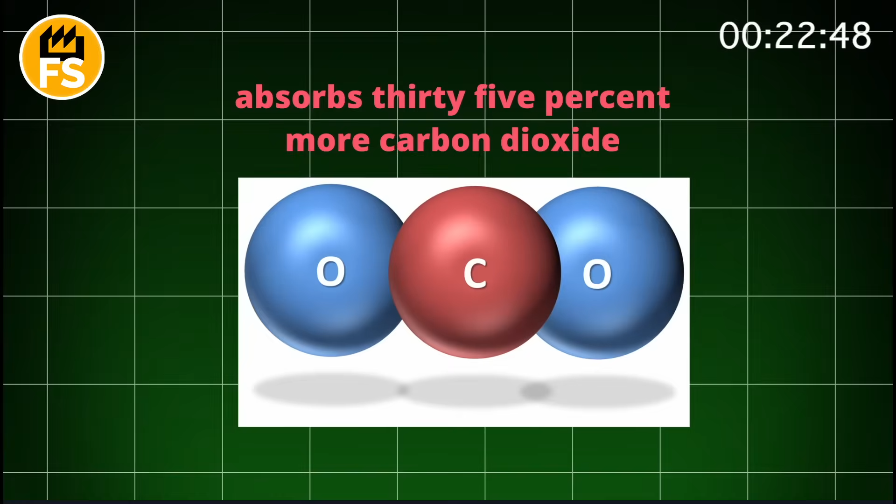It all begins on vast bamboo plantations, covering millions of acres around the world. These are not chaotic thickets, but carefully managed farms. Unlike forests, bamboo does not require replanting. When one stalk, or culm, is cut, its extensive root system, called a rhizome, immediately sends up new shoots. This makes it one of the most sustainable resources on the planet. One plantation can yield harvests for decades without harming the soil. Moreover, a bamboo forest absorbs 35% more carbon dioxide and produces 35% more oxygen than an equivalent area of trees.

Harvesters, armed with simple machetes or handsaws, selectively cut only mature stalks, whose age can be easily determined by color and texture. Young shoots are left to grow further, ensuring the continuity of the cycle. One such mature stalk can reach 60 feet in height and weigh over 100 pounds, making its transportation from the plantation to the primary processing plant a complex logistical task.

When these green towers arrive for processing, their radical transformation begins. First, the long stalks are cut into manageable sections. Then, they are fed into a special machine that, with a deafening crack, splits the round sections into long strips.

The next step is to remove the outer green skin and inner nodes, leaving clean, light bamboo planks. But inside these planks still lurks an enemy of durability: starch and sugar, which are a favorite food for insects and mold. To get rid of them, the planks are submerged in huge vats of boiling water, or a hydrogen peroxide solution, for several hours. This hot bath not only sterilizes the bamboo, but also washes out all the nutrients.

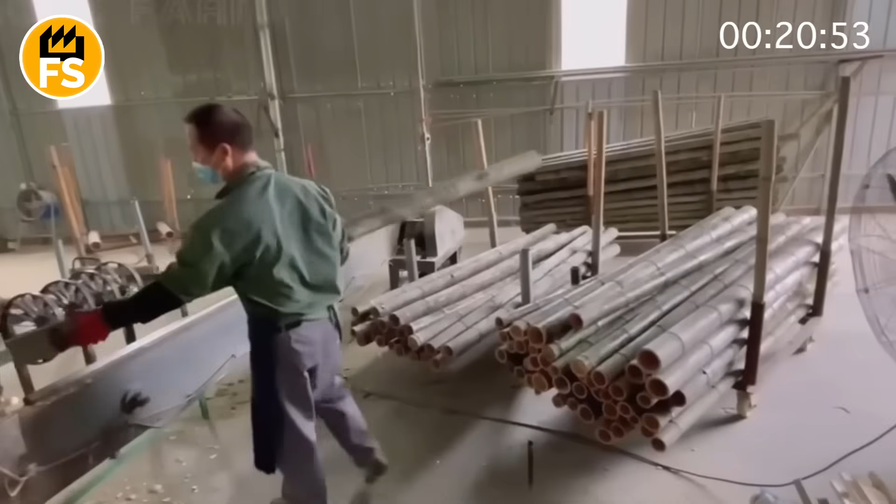After this, the planks are sent for drying. Some producers dry them in the open air, but for industrial scales, they are loaded into giant kiln dryers, where they spend several days until their moisture level drops from 50% to an ideal 8 or 10%. This stage is critically important, as any residual moisture can lead to warping and cracking of the finished product.

But the journey from a 60-foot pole to a smooth floorboard requires even more impressive engineering. The dried planks pass through milling machines that give them a perfectly rectangular shape. Then begins a process similar to making industrial lasagna. To create horizontal flooring, the planks are laid in a single layer and glued under pressure. For vertical flooring, the planks are placed on their edge and pressed from the side, creating a denser pattern.

But the real marvel is the strand-woven technology. Here, the bamboo planks are not just glued together, but completely shredded into long fibers, mixed with an environmentally friendly resin, and loaded into huge steel presses. Under infernal pressure, reaching 3,000 pounds per square inch, and high temperature, this mass transforms into an extremely dense, monolithic block. The hardness of such flooring on the Janka scale can exceed 5,000 units, making it more than 3 times harder than oak, and more resistant to scratches and dents than most traditional wood species.

However, hardness is only one of bamboo's facets. Its other superpower is the ability to transform into something incredibly soft and silky. The process of creating bamboo fabric is a true industrial alchemy. The most common method, known as the viscose process, begins with grinding the bamboo raw material into a cellulose pulp.

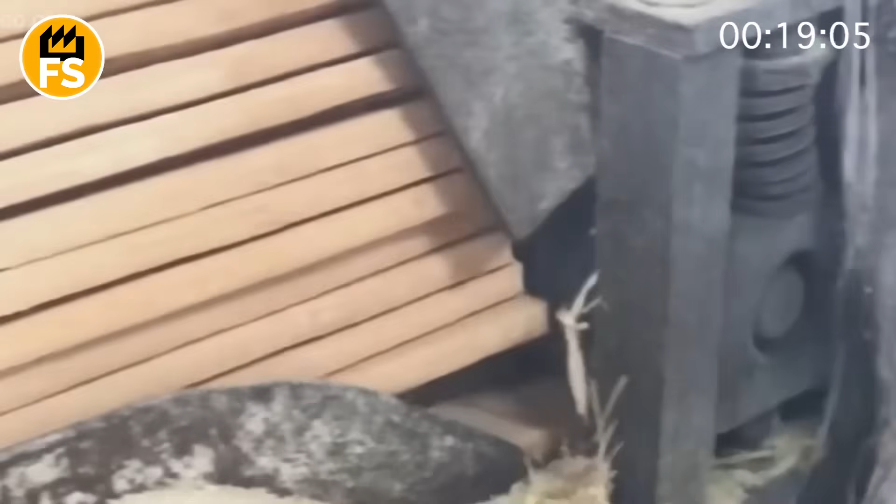This pulp is then submerged in a sodium hydroxide solution, and then carbon disulfide, which turns it into a thick, viscous liquid. This liquid, resembling honey, is forced under pressure through the finest holes of a metal plate called a spinneret. Imagine a microscopic shower. Emerging from the holes, the thin streams enter a bath of sulfuric acid, where they instantly solidify, turning into endlessly long fibers. These fibers are then washed, bleached, dried, and twisted into yarn, from which fabric is woven.

Despite the complex chemical process, the final product is biodegradable and has unique properties. It is extremely soft, hypoallergenic, has natural antibacterial properties, and breathes wonderfully, making it ideal for clothing and bedding.

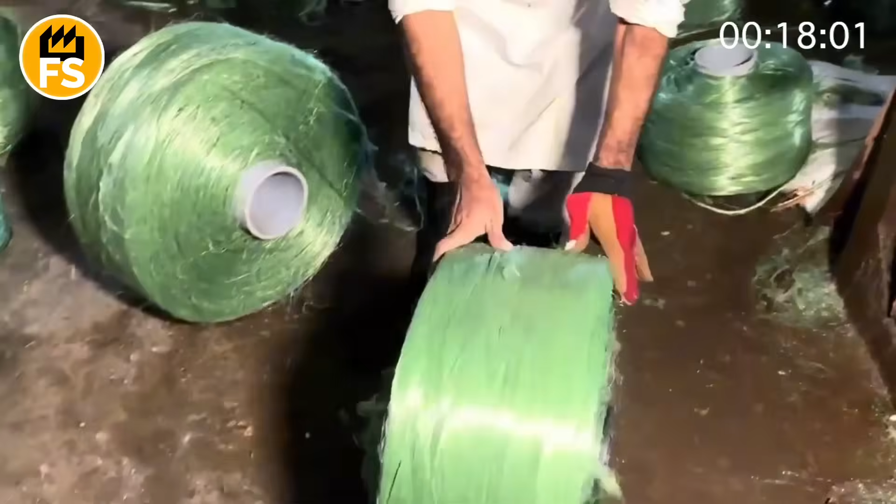The global bamboo market is colossal and is projected to exceed $100 billion in the coming years. Annually, over 30 million tons of bamboo are harvested worldwide, and this figure is only growing. From kitchen cutting boards and toothbrushes to construction scaffolding capable of supporting the weight of concrete, and elements in premium class cars, this giant grass demonstrates its versatility. It is a testament to how nature, multiplied by human ingenuity, can offer sustainable, strong, and beautiful solutions for countless tasks, turning a fast-growing straw into the gold of the modern world.

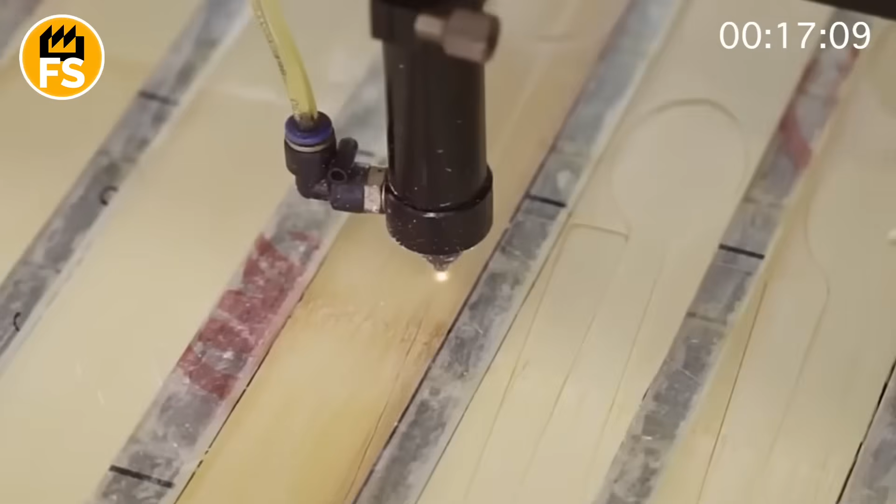Bamboo grows both in the wild and on specially created plantations. Its natural habitat mainly covers tropical and subtropical regions of Asia, where it is an integral part of local ecosystems. At the same time, thanks to its unique properties and wide range of applications, bamboo is actively cultivated on plantations around the world. It is cultivated for the production of building materials, textiles, paper, interior items, and as a source of biomass.

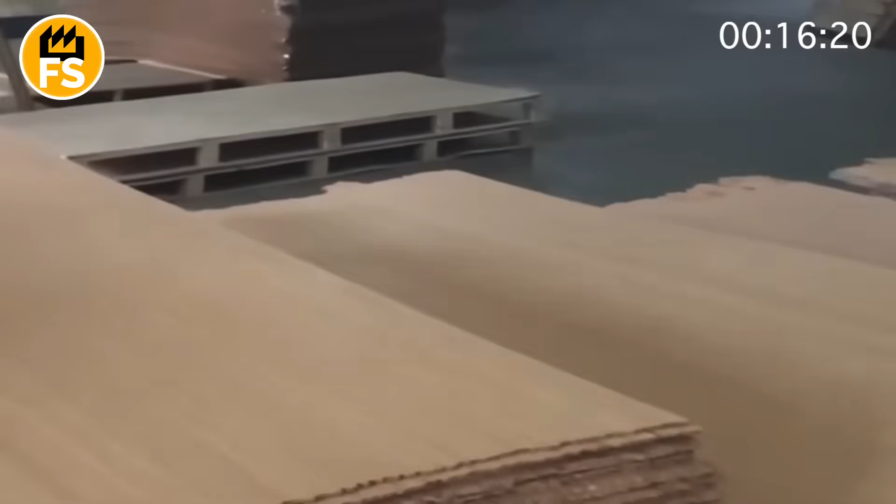In the wild, there are over 1,000 species of bamboo. It is a perennial evergreen plant belonging to the grass family. Bamboo is known for its extremely fast growth. Some species can grow several tens of centimeters per day. Bamboo blooms very rarely, and after flowering and fruiting, the plant usually dies. Growing bamboo requires certain knowledge and care, including proper planting, regular watering, and choosing the right variety for specific climatic conditions. There are even ornamental types of bamboo that are grown in gardens and at home.

Did you know that the machines powering global industry, transportation, and our electrical grids consume energy equivalent to building thousands of the Great Pyramids of Giza every single day? This hidden power isn't just about raw force. It's delivered by some of the most massive and awe-inspiring engines ever conceived. From the dawn of the industrial age to today's modern world, engineers have chased the dream of bigger, stronger, more efficient powerhouses. Get ready to take a journey through history and dive into the incredible scale and engineering genius behind the world's most powerful and giant engines.

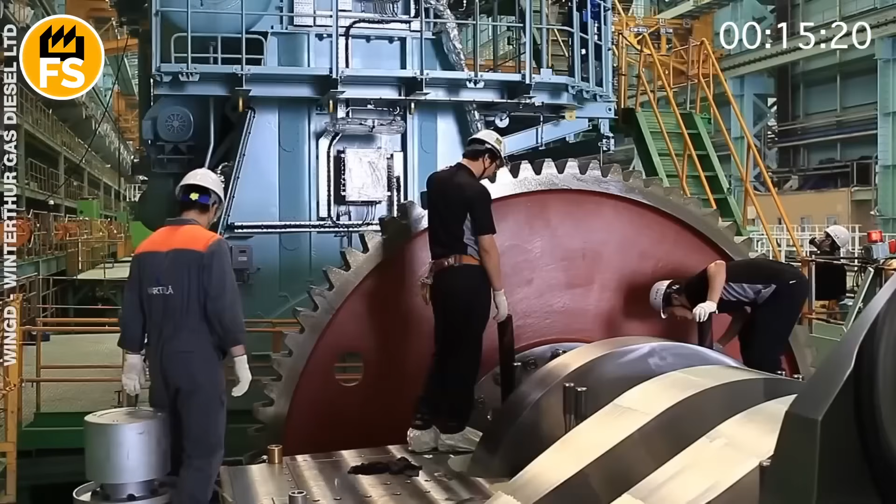Our journey begins in the age of steam, a time when raw pressure was king. Picture the late 18th and 19th centuries. The engines that drove the Industrial Revolution weren't small. Early steam engines were clunky, but they quickly grew into colossal machines. Think of the beam engines, towering structures in factories and mines, with massive beams rocking back and forth, driving pumps and machinery with the power of boiling water. These were mechanical giants, their sheer physical size necessary to contain the immense forces of steam pressure.

As steam technology evolved, so did the engine's power and scale. Reciprocating steam engines became the heartbeat of global shipping. Imagine the engine room of a massive early 20th century ocean liner. You'd see multi-cylinder engines with pistons the size of trash cans, connecting rods like tree trunks, and crankshafts so large they needed multiple men just to inspect them. These engines were colossal, spanning multiple decks. Their rhythmic pounding drove propellers, powerful enough to push thousands of tons across vast oceans. They were engineering marvels of immense moving parts, powered by the simple expansion of steam.

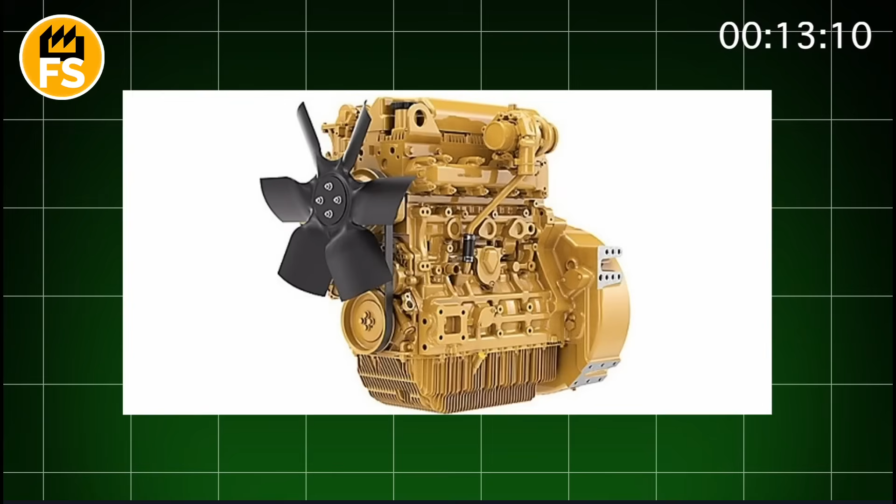While steam dominated for a long time, the early 20th century saw the rise of a new kind of giant, the diesel engine. Unlike external combustion steam engines, diesels burn fuel directly inside the cylinder. This was a game changer for efficiency and power density. Early large diesels quickly found their way into ships and power generation. Imagine a large, slow-speed marine diesel engine built for a cargo ship. These engines are absolutely colossal, often standing as tall as a multi-story building and stretching the length of a gymnasium.

Modern marine diesel engines, like some built by Wärtsilä or MAN, are among the largest machines on Earth. The biggest ones have multiple cylinders, each with a bore diameter wider than a grown man is tall. Their crankshafts are multi-piece monsters, weighing hundreds of tons. These engines produce over 100,000 horsepower, enough to move supertankers and container ships carrying 20,000 containers. The sheer scale of these components—pistons, connecting rods, crankshafts, cylinder blocks—is mind-blowing, a testament to achieving immense power and torque from internal combustion.

As technology advanced further, especially in the mid-20th century, the gas turbine emerged as another powerhouse. Unlike diesels or steam engines that use pistons, gas turbines burn fuel to create hot gas that spins a turbine wheel, similar to a jet engine. While aircraft engines are built for power to weight, industrial and power generation gas turbines are built for sheer output. Imagine a power plant gas turbine the size of a bus or even a small house.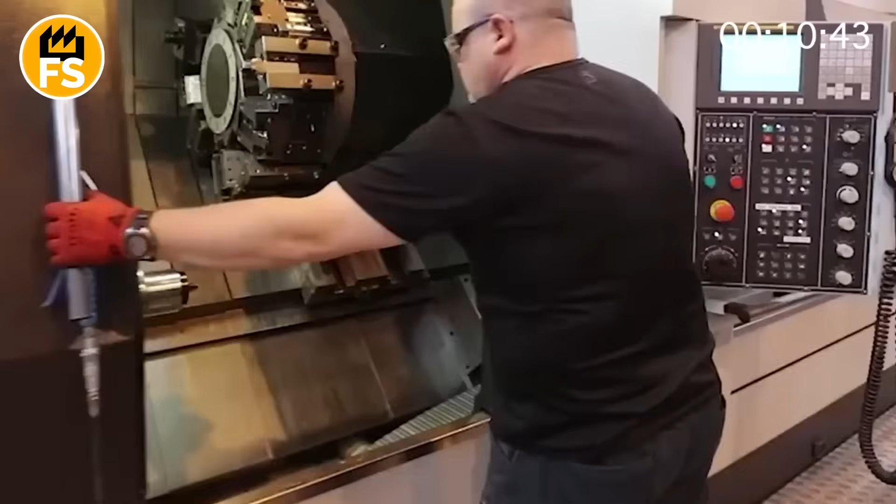Comparing these generations of giants is fascinating. Steam engines were the pioneers, relying on brute pressure and massive physical structures. Diesel engines brought efficiency and incredible low-end torque, dominating heavy transport. Gas turbines delivered immense power density and high-speed rotation, becoming the backbone of modern power grids and high-speed applications. Each technology pushed the boundaries of materials, science, and engineering to harness energy on an ever-increasing scale.

These engines, whether the visible, rhythmic giants of the steam age or the humming complex powerhouses of today, are the unseen heart of the modern world. They drive global trade across oceans, power the trains that move goods and people, generate the electricity that lights our cities and runs our factories, and fuel the massive pumps and machinery of heavy industry. They are a testament to humanity's relentless drive to build bigger, stronger, and more powerful machines.

So, the next time you see a massive cargo ship, a powerful train, or simply flip a light switch, take a moment to remember the incredible journey through history and the engineering genius behind the world's most powerful and giant engines.

Hey, pull that bottle out of your pantry. Sunflower oil. You see it every time you cook, right? It's just oil. Looks simple. Pour it, heat it, done. But what if I told you that this everyday kitchen staple starts as tiny black seeds and goes through a massive, mind-blowing industrial journey?

We're talking about a process of incredible scale, precision engineering, turning millions of tons of seeds into that clear liquid. Forget your garden patch. Get ready to see the hidden factory secrets behind pure cooking oil.

It all begins in the sun-drenched giants of the plant world: sunflowers. Picture fields that stretch beyond the horizon, golden faces tracking the sun. These aren't grown just for beauty. They're an industrial crop, covering massive hectares in places like the American Midwest, Eastern Europe, and South America. Contract farmers cultivate them specifically for oil content.

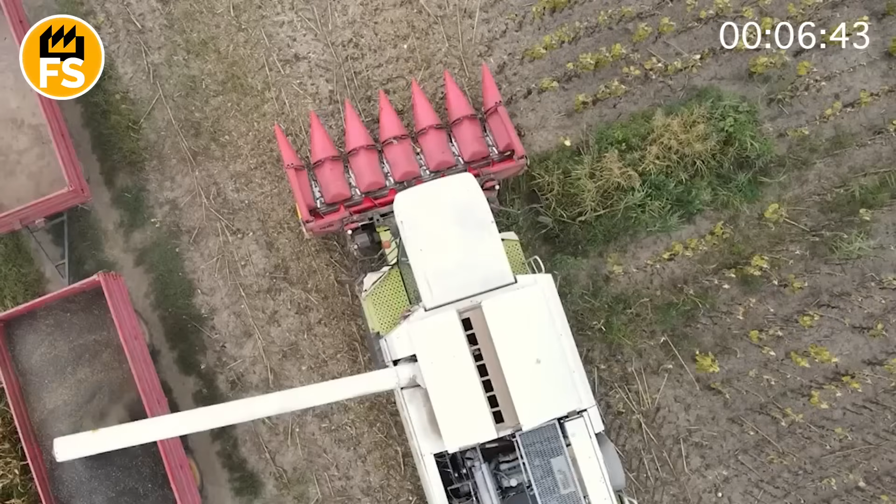When the heavy heads hang low, packed with seeds, specialized harvesters sweep through. These machines are beasts. They rip off the heads, shaking and collecting tons upon tons of seeds in hours. Enough seeds from just one field could fill dozens of semi-trucks. It's harvesting on an epic scale.

Once those trucks dump their colossal loads at the processing plant, the real industrial ballet begins. First challenge: cleaning.

Seeds from the field come with all sorts of hitchhikers: dirt, stones, stems, leaves, even metal bits. Contaminants can damage machinery and ruin entire batches of oil. So the seeds hit a high-speed cleaning gauntlet.

They pass over vibrating screens that filter debris, under powerful magnets that yank out metal, and through air classifiers that blow away lighter impurities. The most impressive tech? Optical sorters. Cameras scan every single seed flying by on a conveyor, using light and imaging to spot defects or foreign objects. Precise air jets blast away anything that doesn't belong.

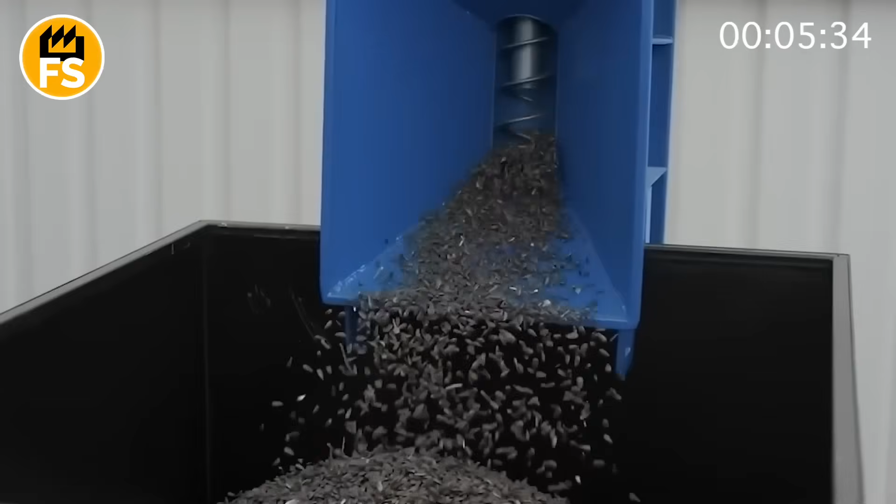They clean millions of seeds per hour, ensuring only pure seeds move forward. This is factory efficiency in action.

Clean seeds still have their shells, and the oil is hidden inside the kernel. Next up, hulling. Machines use impact or friction, think high-speed centrifuges or rollers, to crack the tough outer hulls without smashing the valuable kernels inside. It's a delicate balance of force and precision.

Then, incredibly clever systems use gravity and air currents to separate the lightweight hulls from the heavier kernels. The hulls aren't wasted. They're often used as fuel for the plant's boilers or processed into animal feed. Maximizing yield means using every part of the seed.

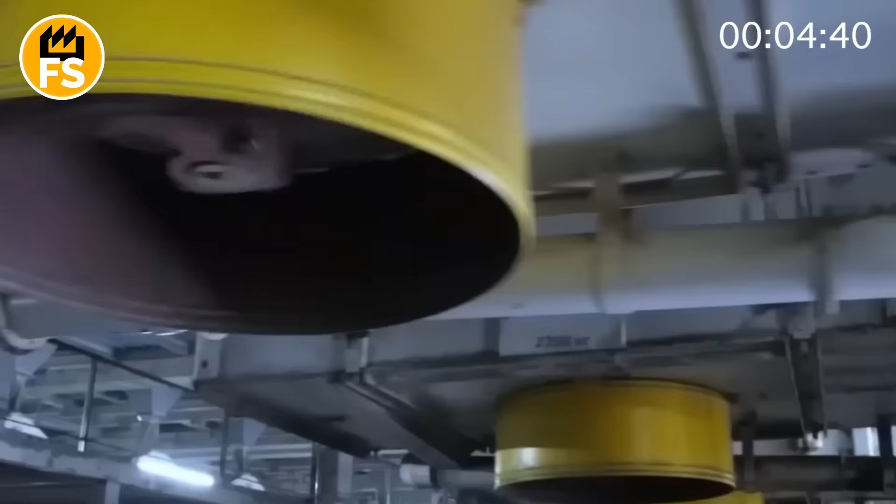Now for the main event, getting that oil out. There are usually two methods. First, mechanical pressing. The kernels are fed into massive screw presses. These are industrial powerhouses. They twist and compress the seeds with enormous force. We're talking pressure equivalent to stacking several elephants on a single spot.

Under this immense pressure, the crude oil is literally squeezed out. It flows out in a thick, brownish-yellow stream. This first press extracts a significant portion of the oil, leaving behind a compressed cake of seed material.

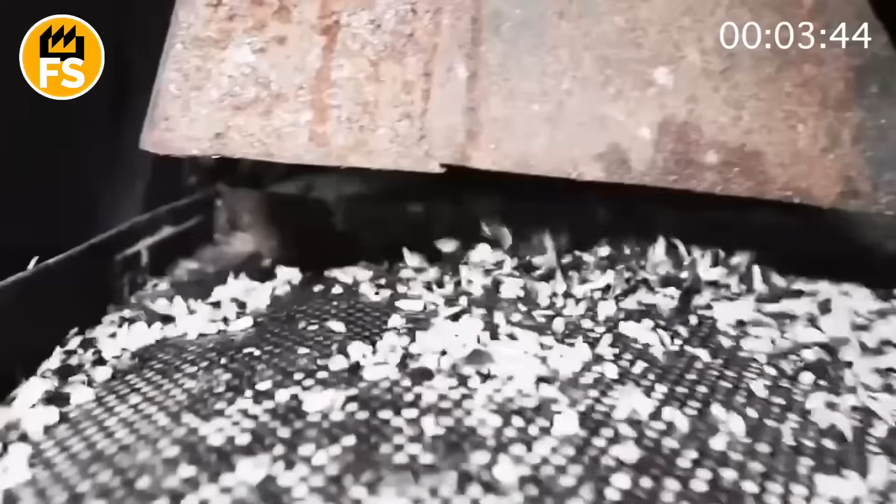To extract the maximum amount of oil, especially from the leftover seed cake, a second method is common: solvent extraction. Yes, solvent might sound chemical, but it's a food-grade process, and the solvent is completely removed later. The compressed cake is washed with a specific solvent, like hexane, which dissolves fats. Think of it like a supermagnet pulling out the oil remaining in the material.

The mixture of oil and solvent is then heated. The solvent evaporates quickly and is captured for reuse, leaving behind the crude oil. This process gets virtually every drop of oil possible, maximizing efficiency on an industrial scale.

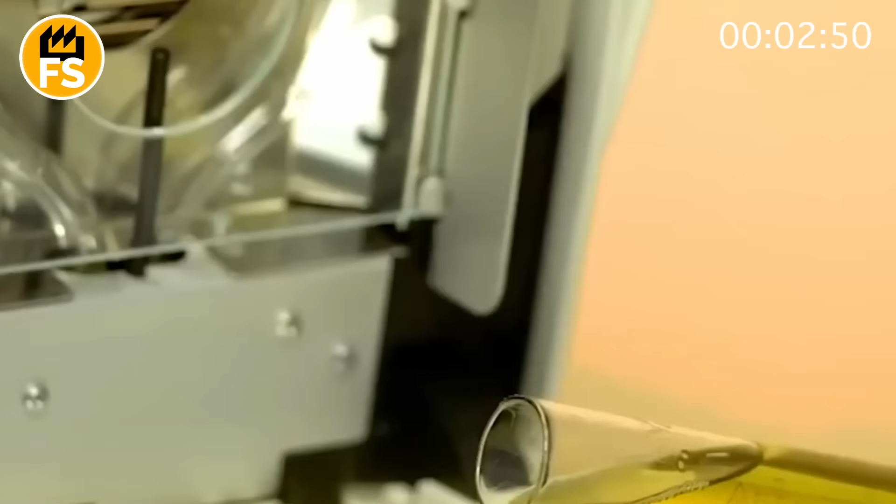After pressing and extraction, you have crude sunflower oil. But it's not the clear, neutral oil you pour in your pan. It's cloudy, has a strong odor, and might contain trace impurities. So it undergoes refining, a multi-step purification ballet.

Degumming removes sticky phosphorus compounds. Bleaching uses natural clays to absorb pigments and make the oil lighter. Then comes deodorization, perhaps the most critical step for a cooking oil. Steam is passed through the hot oil under vacuum, stripping away compounds that cause smells and unwanted flavors. This is what gives the oil its pure, neutral taste and makes it stable, so it doesn't go rancid quickly.

The final steps ensure maximum purity and quality. The refined oil goes through polishing filters to remove any last tiny particles, making it perfectly clear. Then, rigorous quality control takes over.

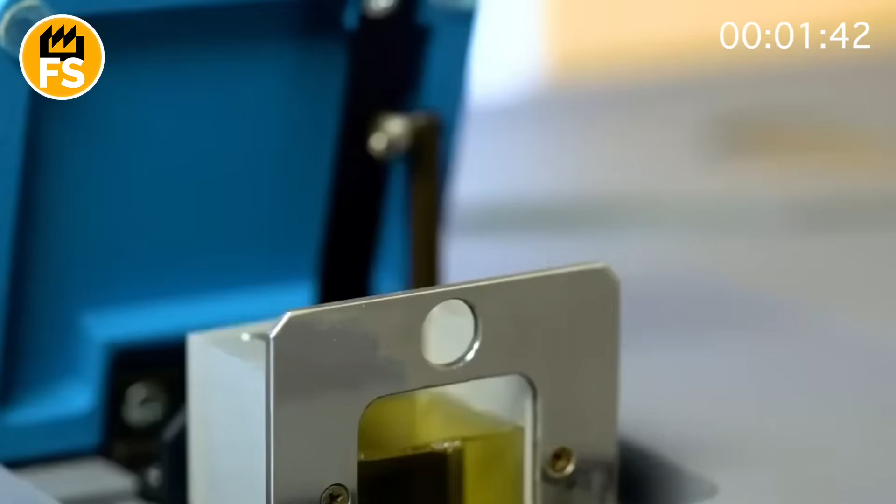Labs at the factory test every single batch. They check for clarity, color, free fatty acids, peroxide value to measure oxidation, and overall stability. This isn't a quick check. It's precise chemical analysis, ensuring the oil meets strict global standards for food safety and quality. Only batches that pass this final gauntlet are approved for packaging.

Packaging is the high-speed finale. The pure, refined oil flows to the bottling lines. Empty plastic bottles or glass jars zip along conveyors at incredible speed. They're rapidly filled with precise amounts of oil, capped, sealed, and labeled by automated machines in a blur of motion.

A large plant can bottle tens of thousands of units per hour. These finished bottles are automatically packed into boxes, stacked onto pallets by robotic arms, and readied for distribution. From a vast field of seeds to perfectly sealed bottles, it's a journey of transformation driven by engineering and scale.

So, the next time you pour that clear, pure sunflower oil, take a moment to think about the complex industrial magic that happened behind the scenes. From countless tiny seeds, through powerful presses, intricate cleaning systems, chemical purification, and high-speed bottling lines, it's a product of massive scale, precision, and technology. It's a fascinating look at how agriculture meets industrial engineering to create something essential for everyday life.